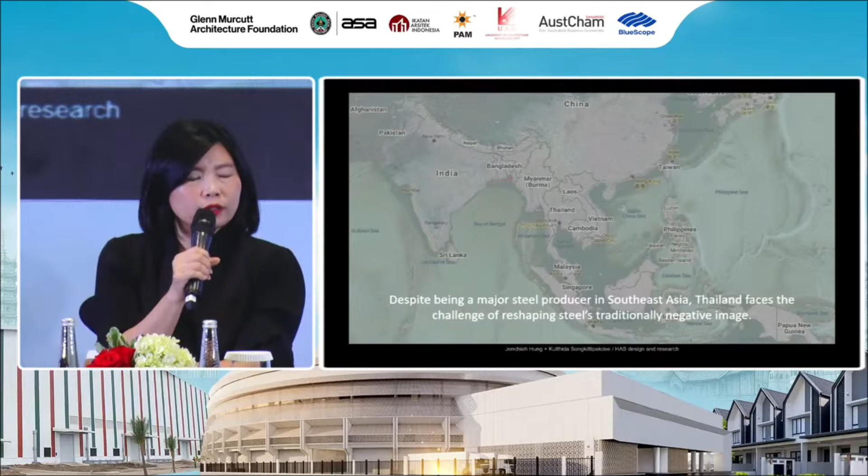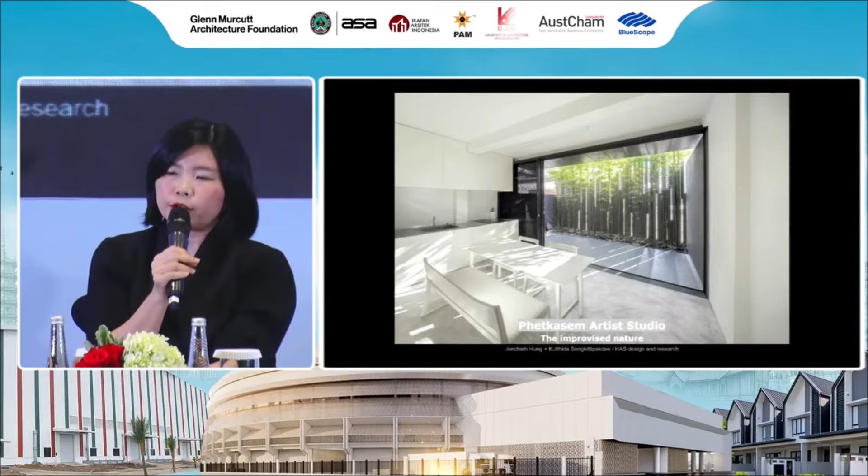From this point, it's applied to a new project that we did for the fence of the same village in our research, and the fence changed the way the steel fence looks. It becomes a facade that creates a new space. And also in this project we call Phetkasem Artist Studio, we really improvise the new nature. It brings a new pattern of green bamboo within the fence limitation of the townhouse in Bangkok. So with this exploration, we continue trying to imagine new ways steel or metal can shape things, even giving new identities.

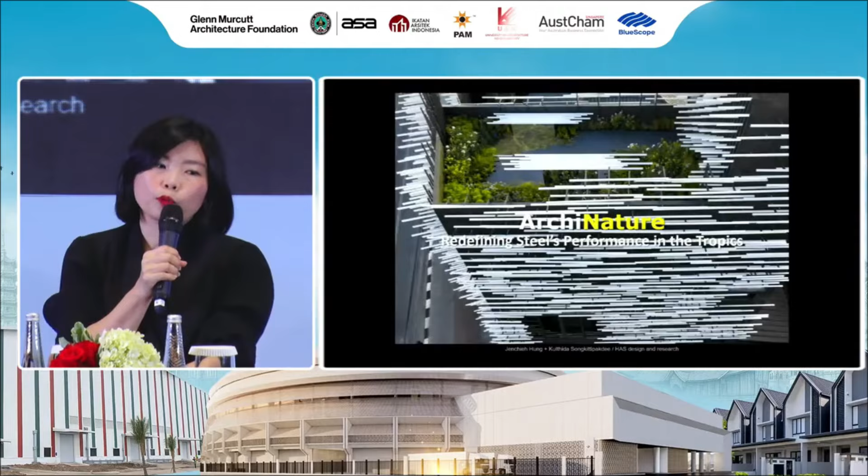So for me, as design research, we think that a resilient future is how we respond to nature in the new nature. That's the term we call archinature. So our architecture designed by HAS tries to squeeze out how materials, steels, can redefine the performance of the new nature in our city in this tropical climate. Yes, that's all from my part.

Thank you for the thoughtful presentation. As you can see, HAS has done a lot of reinterpretation of spatial enclosure, applying steel in different ways and creating different shapes to create different atmospheres, working along with the climate, the sunlight, the breeze, and nature itself.

So, not to waste any more time, Mr. Budi, I'd like to give the stage to you and your presentation, because I think you have quite a lot to share with us. Can you introduce yourself a little bit? Yes, good afternoon. Allow me to introduce myself. My name is Budi Pradono. I'm the lead of the architecture firm called Budi Pradono Architect. It's a research-based firm from Jakarta.

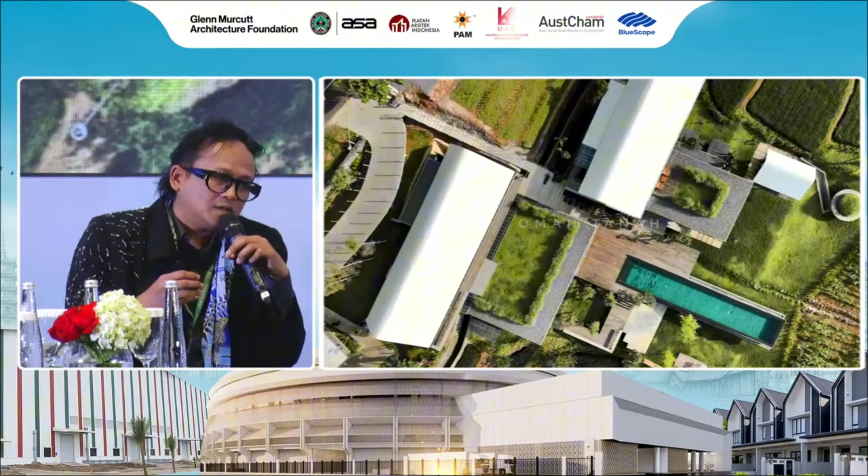And then I try to understand, to listen to the local architecture and interpret it in a modern way. And of course, using steel as a medium to translate the combination between the craftsmanship, the soil, and the concept of the local people in that area. So we can understand that steel is a medium to create new architecture. In the global era, I think it is very important for architects to bring something important to each site, because each site has its own spirit that we have to dig into and create new architecture from.

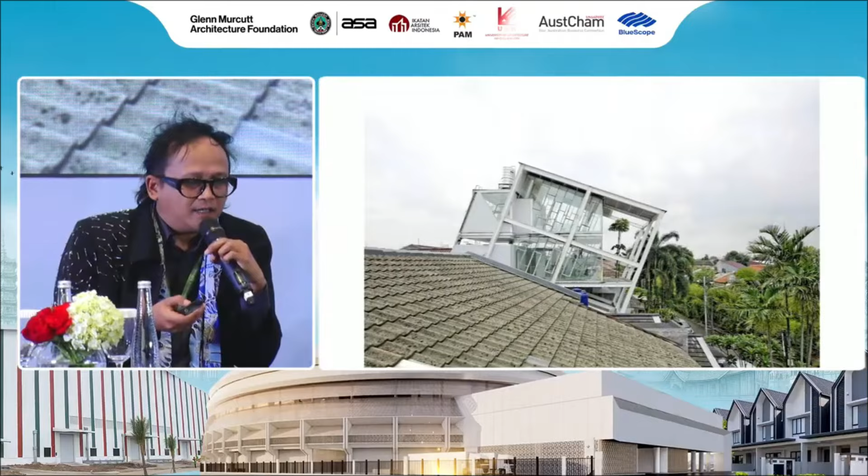Another one is the slanted house in Jakarta. It's made of steel, but it is a kind of critique of society. So I try to listen to what's going on in a part of Jakarta called Pondok Indah. It is a middle-class area, and the successful people redefine their houses with Doric columns, with something from the West. And then I introduce an antithesis by tilting the buildings upside down. So we use steel as a critique of society.

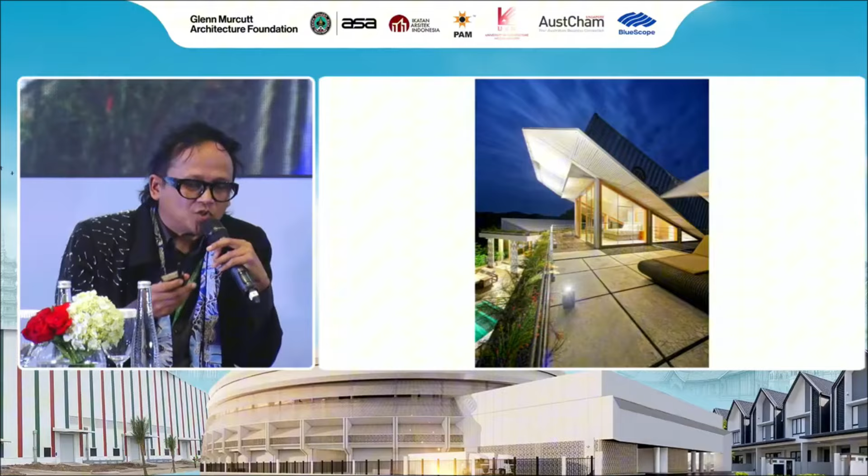Not only a material, a practical material, but also to redefine the spirit of the place. So this is another one in Lombok, in which I try to bring something new, try to understand the beauty of the place and bring the steel as the glue to combine with the spirit of the place.

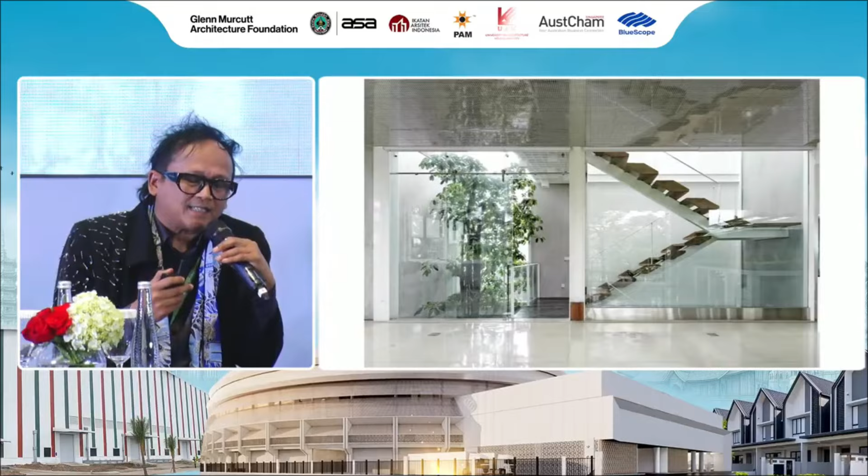This is also in Jakarta. Everything is made of steel, but actually the nature tries to colonize the building, because we try to question nature itself for ourselves. Post-pandemic architecture brings us to introduce something new, to introduce a new relationship between people and nature.

So this is my last presentation, which is the new restaurant. Actually, they have an existing restaurant, but I had to bring a new spirit to this restaurant, because during the pandemic the restaurant was dying. Then I put in a new direction, a new meaning. Structurally it's made of steel, but I also introduce steel to bring the nature inside the building.

So actually, it is very important for architects to ask themselves to bring something new beyond the materiality. And of course, the spirit of the place is very important. Here I try to connect the city and nature, the city of Bogor and the mountain. With the connection, people can relate to something new.

So this is the existing building that we have to keep, but I introduce a new direction to bring a new spirit, to bring new architecture. So we have to use steel with a creative mind, and the locality, the local concept, is very important. So our approach is always trying to understand the spirit of the place, to bring new architecture. Thank you.

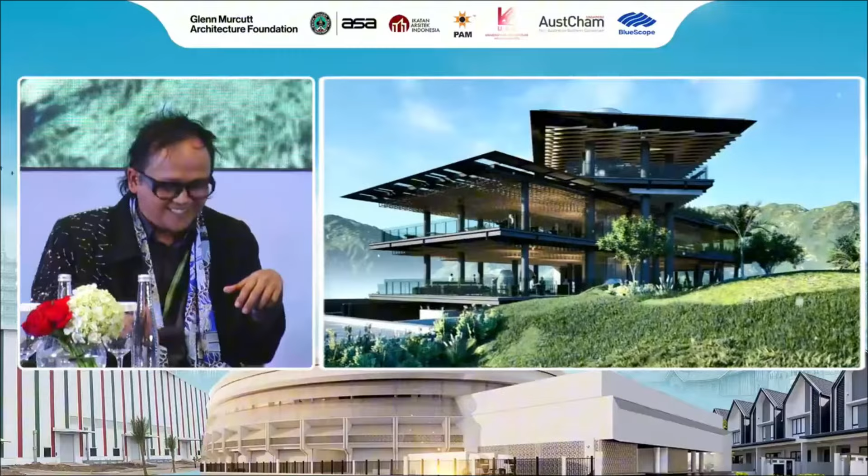Well, in celebrating the richness of the open-air lifestyle, Mr. Budi has shown us a lot about the combination between the heaviness of traditional materials like wood, concrete, bricks, and stone, as opposed to the lightness of steel structure and steel paneling. You can see that opaque material can come together with the lightness of steel and glass.

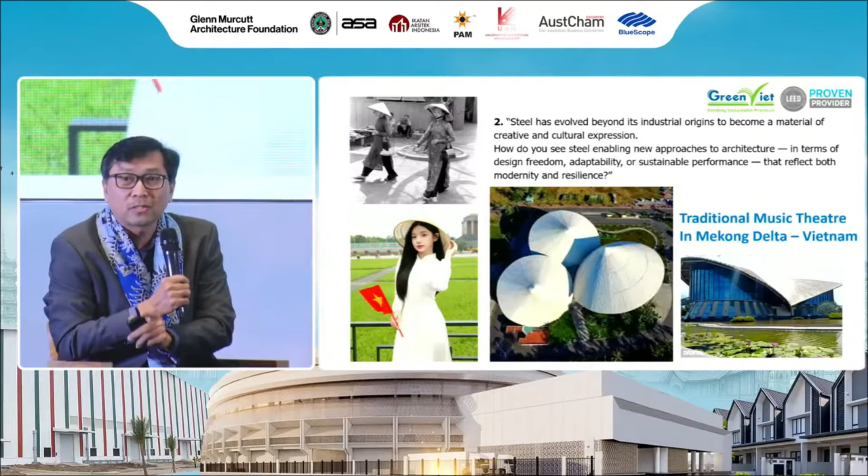And right now, you have to face climate change, urban change, cultural transformation. It means you have a lot of constraints to come out with the expectations of the project. And the expectations include the aesthetic, meaningful, enduring, sustainable, resilient - a lot of things. So you will be facing a headache, right?

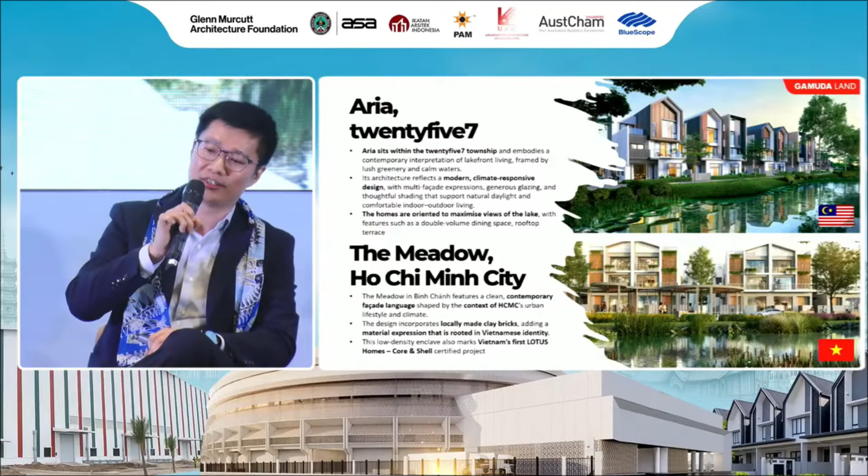But other than the climatic response, there's also contextual response. One of our projects showcased here, ARIA, is within a suburban context. This led us to be one of the earlier adopters of the A-frame concept, which, in look and feel, is both modern and at the same time addresses that climate responsiveness.

The Meadow in Ho Chi Minh City is a different context, so we used locally made clay bricks as well as vent blocks in the facade to express that local material identity, but at the same time still meeting contemporary design facade language, very suited for the Ho Chi Minh lifestyle.

So I come from an era where I used to do project management, and back then when you build terraces, it used to be a copy, paste, and flip design. Very buildable, very efficient, but monotonous, right? But we have come a long way.

Today we have the multi-facade approach. If you stare and look at the picture on the top left long enough, I think you'll begin to see alphabets. The first one looks like an A, there's an I, A-E-I-O-U, right? And since then, materials such as steel enable us to push the design freedoms for the houses or homes that we build. Today we have added another two more letters, which is the U and the N, right here. It looks like a U and N.

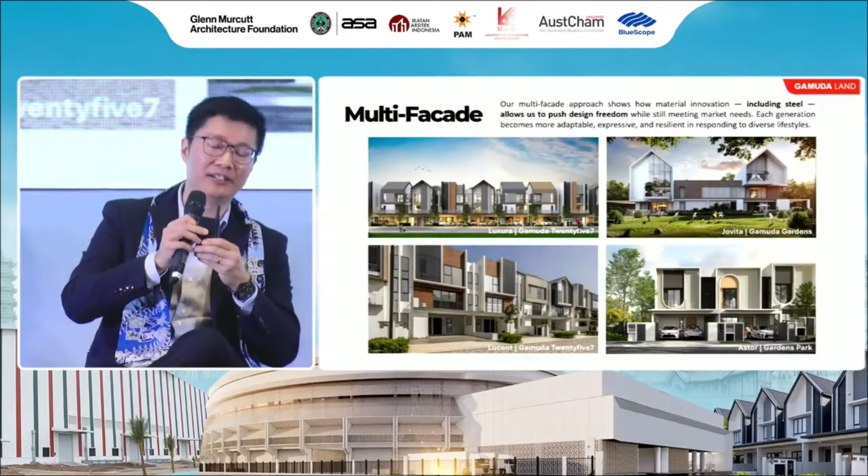But this isn't built using steel. We have our own digital, next generation digital IBS capability. IBS stands for Industrialized Building System, where the entire building, including the facade, is all built within a factory environment, very controlled, very precise. The entire building, all the components, are then brought to site and assembled just like Lego blocks, right?

Where identity is already present, I guess steel is not a tool for expression, but a tool for continuity. One example would be 75 London Wall, which is our flagship adaptive reuse project in London—unfortunately not in ASEAN. But it retains 89% of the existing structural fabric, including key facade elements such as the stone walls.

This is one of the major refurbishment projects in London to date. Moving on, something closer to home, our Wetlands Arboretum Centre. It is the first zero carbon building in Malaysia. Since then we have won several other awards, including ASEAN Energy Awards, certification by MGBC's carbon score, as well as Green RE. This essentially is a living museum within the 90-acre site where we house more than 150,000 trees as part of our conservation efforts.

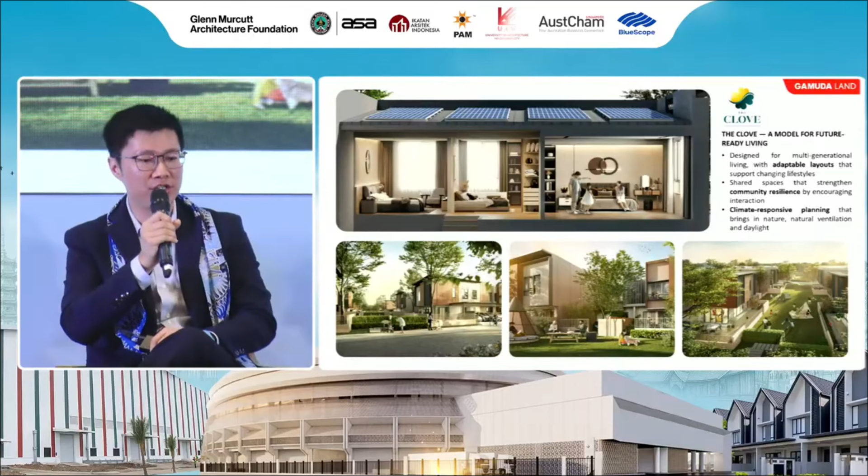Looking ahead, I see three responsibilities for ASEAN architects: to design for adaptability, meaning providing layouts that cater to multi-generational living as well as changing lifestyles of the day-to-day household or community. Other than that, design that strengthens community resilience by encouraging interaction as well as well-being. And last but not least, design for climate responsiveness, which is to bring in nature, natural ventilation, daylight, and resource efficiency.

Our answer to that is the latest typology called the Clove, which showcases that architecture can be more than just flexibility, resilience, and climate-responsive design that can cater to the next generational lifestyle. Okay, thanks—right on time.

Because we are running out of time, I'd like to conclude something very tangible for all of your presentations. We have moved on from something very conceptual to something very practical and visionary. I'd like to address that the future ahead is not much about the characteristics of form-making, but now and in the future it's going to be much about the characteristics of the thinking process.

Regardless, whether the result is going to be mundane or cliché, who cares? Right now we have to be very responsible. We have to take care of the future and the younger generation, the next generation to come. Steel is a part of that—it's going to play a big role for our professionals in terms of materials and new opportunities. Thank you.

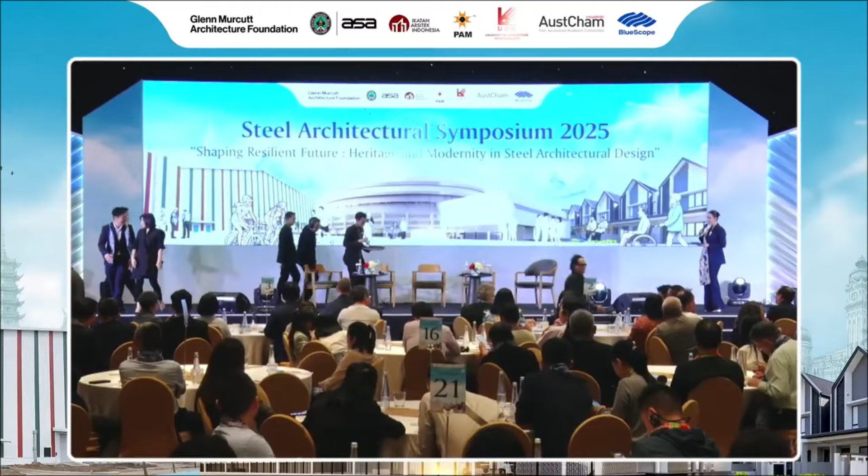Ladies and gentlemen, we have heard from our speakers today that architecture today is not only about constructing structures—it is about designing experience, engineering resilience, and ensuring our cities can stand the test of time, environmentally, socially, and culturally. We also heard that collaboration is a big part of this; it is truly essential to gather together all the stakeholders. All of our speakers today have shared how steel can strengthen sustainability, inspire creativity, and reduce carbon footprints, making this a more responsible way of thinking about the future and the next generation—building cities that are not only beautiful, but resilient and meaningful for our kids and grandkids later on.

I learnt from a wonderful architect here in Australia, Col Madigan, on the Dee Why library that he had done, the beautiful quality of steel in the finesse that one can achieve with it, that beautiful thinness and the tapering to the edges. It's a most wonderful material. And then when it's protected properly and painted beautifully, the material sings. It is so beautiful when used in a beautiful way. So steel is one of those materials that you can actually capitalize on and develop your work in a way that I see gives you the junction, potentially, of the poetic and the rational.

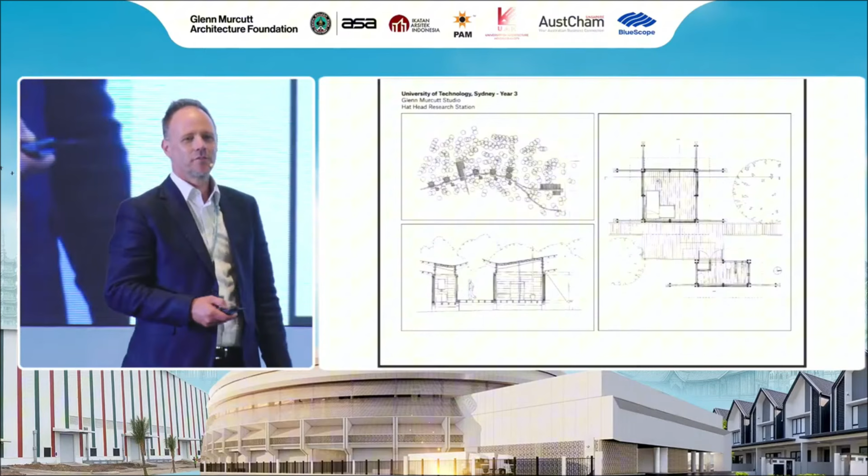I was very lucky. At university, I had Glenn as my studio professor in third year at UTS. And he challenged us to design some little research huts for a coastal site in northern New South Wales. And I was a young, kind of naive student, but I jumped right into it and really enjoyed having him as a tutor. And it really changed the way that I designed, I guess, fundamentally, right up to this point in my career now. It just shifted my entire perception.

After I finished at university, I wrote him a letter and said, "Look, Glenn, I'm graduated now. I'd be interested to know if you need an assistant on any of your projects that might be coming up." And I was expecting, no, I don't take on staff, I don't take on anyone. But I was pleasantly surprised to get a phone call back from Glenn saying, yes, actually, I've got to go and tutor over in Austin in Texas, and I've got a house down in Kangaroo Valley. Would you be able to do the tender and construction drawings for this particular house?

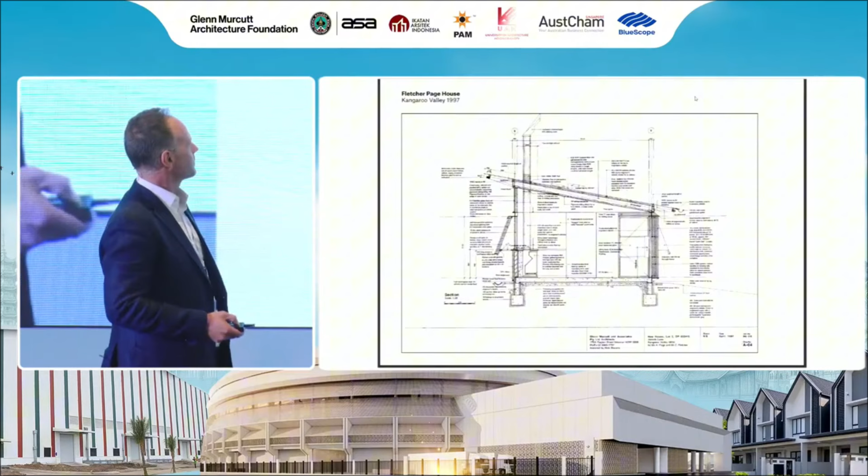And I was a fresh graduate, and this was just the most wonderful gift. So I had this opportunity to work on this project. I did all these drawings. What's funny is you'll see the writing here. I was so nervous about copying Glenn's beautiful handwriting that I thought I wasn't even going to try. So I wrote it all in Helvetica, printed it out on little stickers, and then stuck them on the drawings one by one. But anyway, it's neat and tidy.

And then it went on to get constructed. And it's a beautiful steel-framed house. You can see here this lovely articulation of these steel components, and then the big oversailing roof, which really mirrors the sloping site, and it follows that down and captures all that lovely northern light on the northern side of the building, but then provides this really lovely sense of protection and weather protection. And across the top, there's this kind of sheet of glass.

So about 20 years ago, there was this beautiful book that was produced by Françoise Fromonot. And in this book, there were a couple of projects which I noticed hadn't been built, and there were just some plans in there. And I was fascinated to think, gosh, I wonder what this would have looked like. It was just a plan, not much else. And it kind of got stuck in my mind, and it was always something I was interested in. So, let's go back, sorry.

So, fast forward to about 6 years ago, I'm at a function, and Glenn is there, and we caught up, we had a lovely conversation, and I asked him, are there any more books coming out about your work? And Glenn said, no, there's nothing I can think of at the moment. And then out of the blue, I said, wouldn't it be great to do a book all about your unbuilt projects? And Glenn thought about it, and he agreed. And so we said, well, why don't we do 10 of your projects?

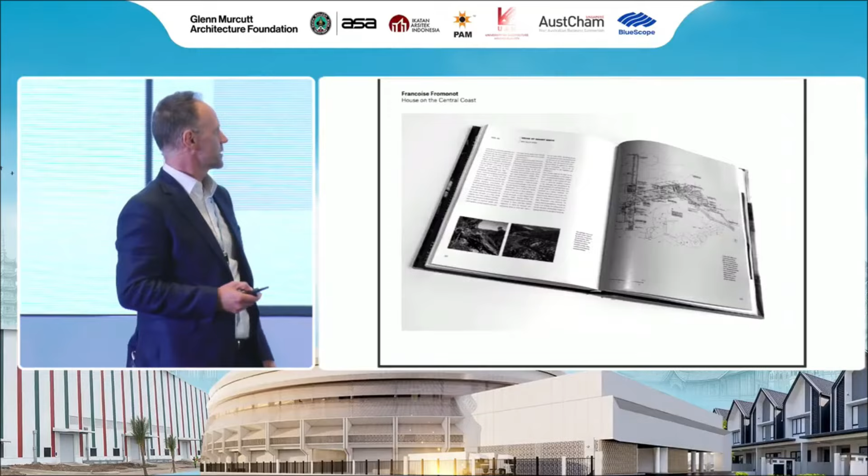We'll recreate them on the computer, so we get all the original drawings. We recreated them in the computer using Revit. And then we created CGI views of each of those buildings as if they had been built and as if they'd been photographed. And then that formed the basis of the book. We chose the 10 projects. It included all of his original drawings, and then I interviewed him about each of the projects as well. And it was the most wonderful privilege to go through this process, and I learned an awful amount about what it takes to design a good building.

So I'm going to share 3 of these buildings with you this afternoon. They all feature steel as a part of the way they've been constructed. And they've all got different aspects to them, all fairly unique to each of their sites. The first one is a house in southern Queensland. Now, what's interesting about this, you can see that's the site location there. And there's this kind of creek or river that runs all the way through.

It's the Nerang River. It's effectively a rainforest location here, and it's not dissimilar to much of the rainforest that you experience in Southeast Asia. It shares a lot of those kind of qualities. It's a very moist environment. There's lots of dense planting, things like mud. There's a lot of mosquitoes, that kind of thing. But it's a really beautiful area.

And so these were the original drawings that Glenn produced. And you can see it's a very simple little pavilion. All of his projects are hand-drawn, by the way. These are just wonderful drawings. But if you analyze the plan, you can see down here that really it's a very simple living pavilion. It's a pair of parallel walls, a lovely big sliding open door there, ventilated windows at either end with the 2 bedrooms, living in the middle, then a services spine through here which contains things like the joinery, the kitchen, and at the back here there's the little bathroom and the laundry and an entry and arrival space.

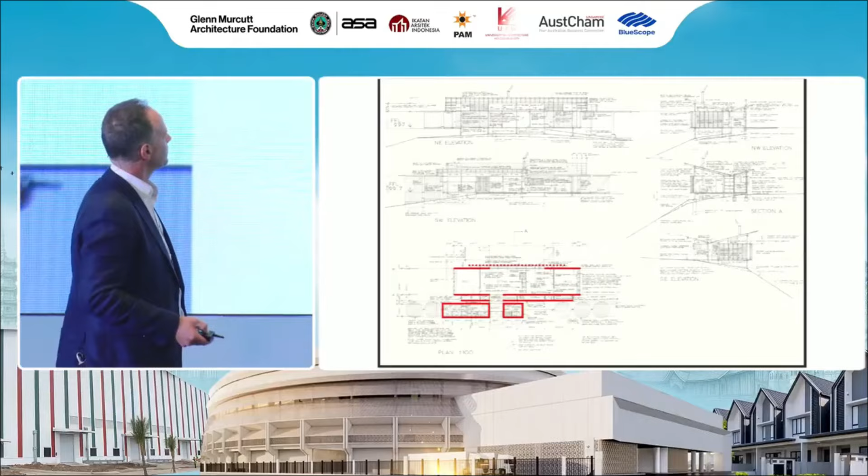If you then look at the elevations, one of the things that Glenn does very well is he creates a very strong sense of order using these horizontal lines through here. And that's really expressed, I guess, with the structure and the steelwork of the building. And that's particularly evident here in the elevations.

Below that line, this is what Glenn talks about, it being an architecture of response. So he locates windows, doors, openings in relation to what the job of that particular thing has to do. If there's a view out that way, he'll kind of frame that view. If it's an entry point, it'll either be wide or narrow depending on its use.

But then up above, you've got this lovely expressive steel roof up here, which is then supporting some timber rafters up in the roofscape. And that whole space along the top there becomes a clear glass clerestory to allow natural light deep into the floor plate.

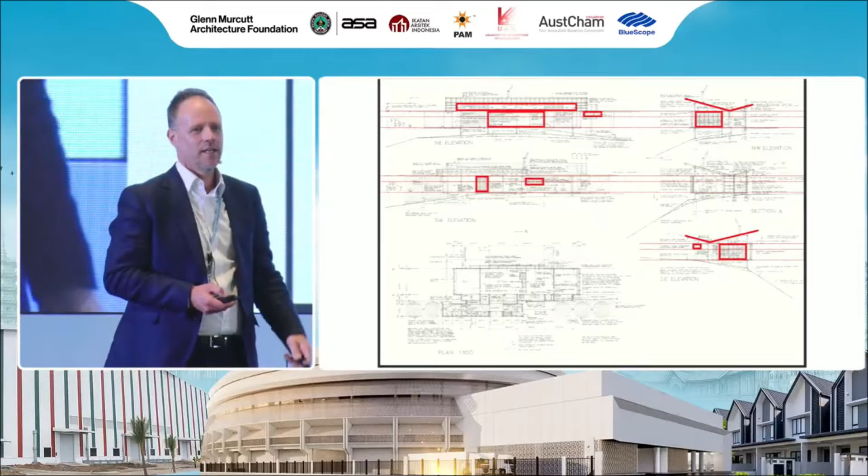But what's really good is that the overhang here is angled perfectly so that it cuts out all of the summer sun, but it allows all of the winter sun into the house. And it performs the dual purpose of collecting water on this otherwise pretty remote site. You can see the water tanks are down through here, all these steel water tanks.

And the reason that Glenn chose steel was because, again, of the location. It's a very moist site, it's very humid. And the concern was that by using timber as the primary structural system, that would start to warp and deform and potentially create problems with gaps opening up and so on and so forth. So the decision was made to use a steel frame.

But it was done with great efficiency. And the idea was that that would form a very rigid framework which would avoid the house from creeping or moving or expanding or contracting. And that would give it some really great long-term resilience. But then the whole building on top of that was then clad in some lovely timber materials.

And you can see here, these are some of the CGI views that we created. It's an absolutely beautiful facade, isn't it? It's got effectively simple kind of crinkly tin walls through here on either side. But then that rail which runs along the top, that steel rail there and one along the bottom, provides kind of the guidelines for these large, expansive glass sliding doors.

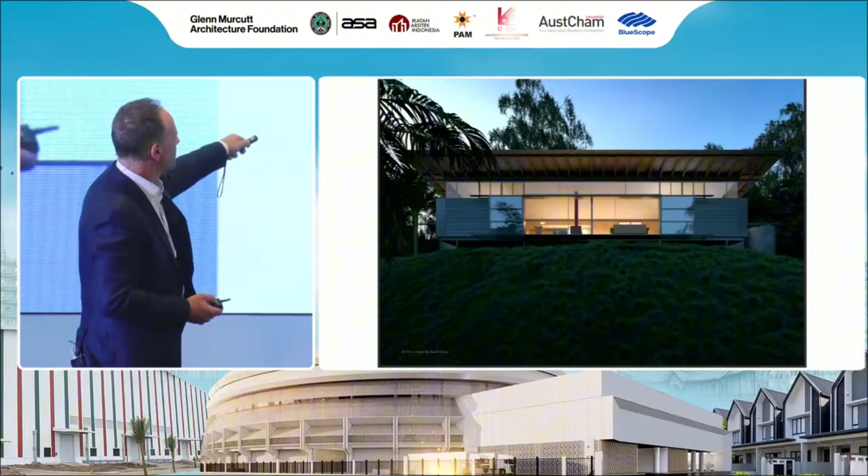And these doors are actually made up of 3 different layers. So the inside layer is insect mesh. The next layer is 2 sheets of kind of sliding glass doors. And then the outside layer, quite often, is the retractable external blinds, which can then get lifted up and down. Which means that you can start to tune up the building according to the time of the day, the time of the year, what the weather's doing.

And in a sense, he describes it like it's like you're sailing a boat. You can kind of trim everything and make it work for you. So you can provide, as he calls it, that sense of prospect and refuge.

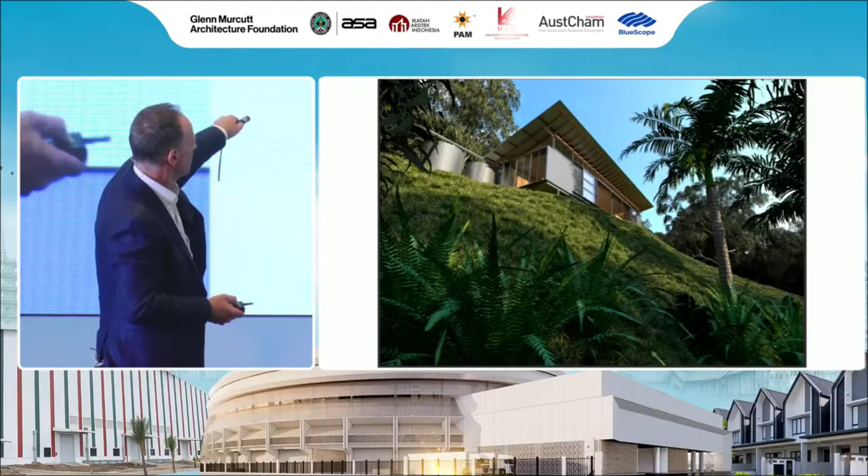And then on top of the building, these beautiful hardwood timber rafters, which then kind of lean out over the landscape to form this really beautiful, sharp steel roof edge here with the corrugated iron. And at the ends, there's these lovely portals. This is the entry side of the building. And again, it's just really, really tough.

It's very simple materials. And one of the things that Glenn quite often talks about is using simple materials, but using them really well. So there's nothing high-tech or expensive or remarkable about the materials that he uses. They're fairly simple, easily available, standard materials, but done with some great inventiveness. So again, it's just simple crinkly tin wall cladding. We've got the big water tanks here as well.

But up at the top here, there is some simple plywood cladding above that edge there, and then simple hardwood beams and rafters. It's a very kind of limited palette, but it works really well in concert with the steelwork. And at the ends where the bedrooms are, you can see it's got operable glass louvers, again for ventilation.

And this is one of the great advantages that you have in Southeast Asia, is there's no requirement to heat a building. So insulation is of no concern, which means that you have the ability to let your buildings breathe. And it's something that we can only dream of in Australia. The legislation with our building codes are starting to make us close buildings up and seal buildings up as if they've been air-conditioned, which I think is a great shame.

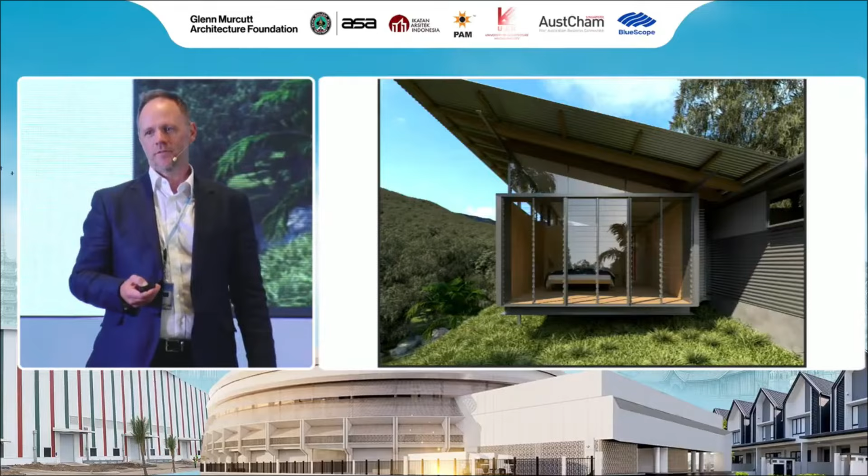But the advantage that you've got in this climate is the fact that you can open things up when you want and you can close them down when you want as well. Natural ventilation, breeze, fresh air, all these wonderful advantages that you've got here, which really can be quite exploited in terms of your designs and the way you put buildings together.

And these are some nice simple shots. This is the gutter, which actually goes beyond the house, and there's this lovely kind of rounded edged trim. Again, it's just a simple dish gutter made out of standard steel profile, but it's sort of treated, refined, improved upon.

Some nice interior shots then. This is all clad internally with hoop pine, some lovely flag halyard chairs through here, again to provide a sense of sort of ventilation for the human body. And in the heart of every house that Glenn does, there's typically a nice big bright red fireplace for those odd days, maybe 2 or 3 days of the year, when you want to heat your house up.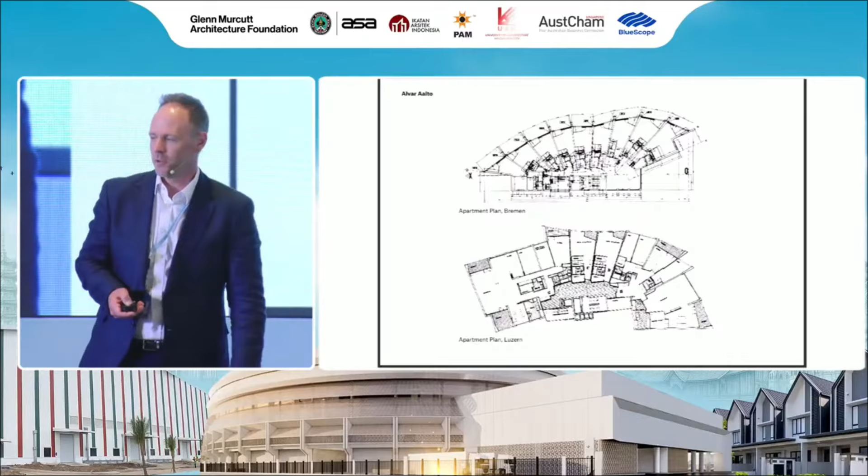And then the bedrooms here, which fan out on the edge, break away from the main building, which I think is in many ways very similar to, and again, some of the students in the room might recognize these as Alvar Aalto buildings, which was one of Glenn's heroes, which fans out to create this lovely kind of built form and provide this sort of sense of generosity. It's also in many ways quite similar to Utzon's house in Majorca, with the change in direction to pick up different views with these separate pavilions.

Again, horizontally, the whole house is broken into these two clean planes. The steel structure is all through the main pavilion with the steel roof on top. But this section through here is actually rammed earth, which is a really beautiful material. You get the local dirt, local clay, and mix it with concrete, and it gets effectively rammed into these beautiful walls. And what that does is it brings the color of the local soil and the local area into the building to make the building feel like it sits into its location and looks like it belongs.

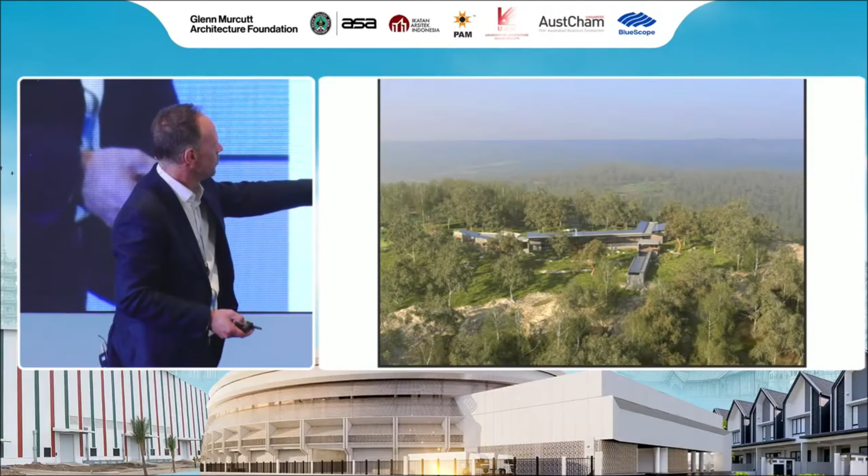And so here are some of the shots that we produced. You can see this fantastic lap pool, which races out towards the peak of that mountain in the distance, and the way it wraps around the top through here. And these views through, the pool kind of erupts out. What's interesting though is the way that Glenn creates that kind of platform, that simple ground plane. The ground below it can drop and rise and fall as much as you want, but it maintains that planar level, which is a really effective way of dealing with some quite tricky topography.

And here at the ends you can see the bedrooms are all splaying out there with the individual children's rooms, and then the main living pavilion here with that lovely steelwork. And there's that lovely night shot. And the view from the front.

And again, all of these are sliding glass doors. They all open up entirely or close down entirely. There are operable louvers which come down to provide privacy and some sun protection, particularly when it's quite glary, and insect mesh as well, and then a covered outdoor porch space. And that's us standing there in the porch, looking that way.

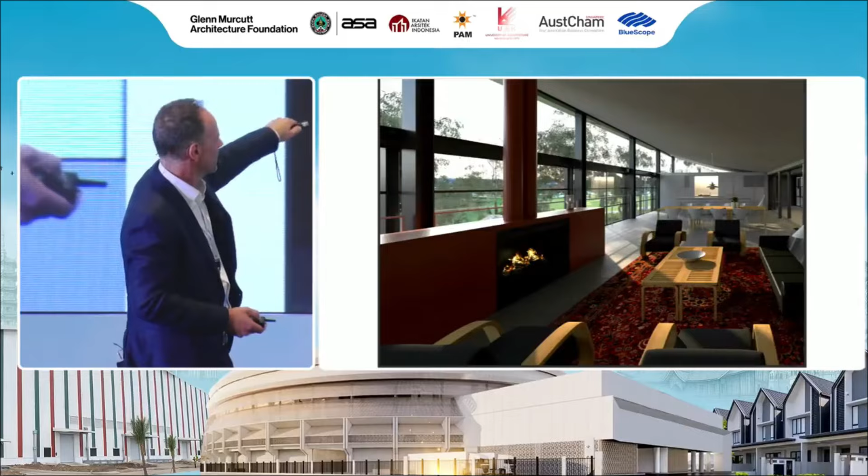Very elegantly designed, very simple, and a really lovely use of steel, which really opens up, I think, the views and the aspect. And again, the nice red fireplace in the center, and the open plan living environment through here. Once all the doors are open, you can actually see the handrails remain. There's actually balustrades there, so once the slope opened up, there's still that safety rail. Again, just in a lovely piece of square steel, very simple.

And a view back then through that main living space from the kitchen. And then that's the main bedroom at the far end. You can see that lovely rammed earth wall system, which kind of layers up. And this is Glenn's favorite shot, that shot across the pool. He loves water in his projects, absolutely loves it. But you can imagine being in there, can't you? It's a beautiful space, sort of swimming out towards that mountain.

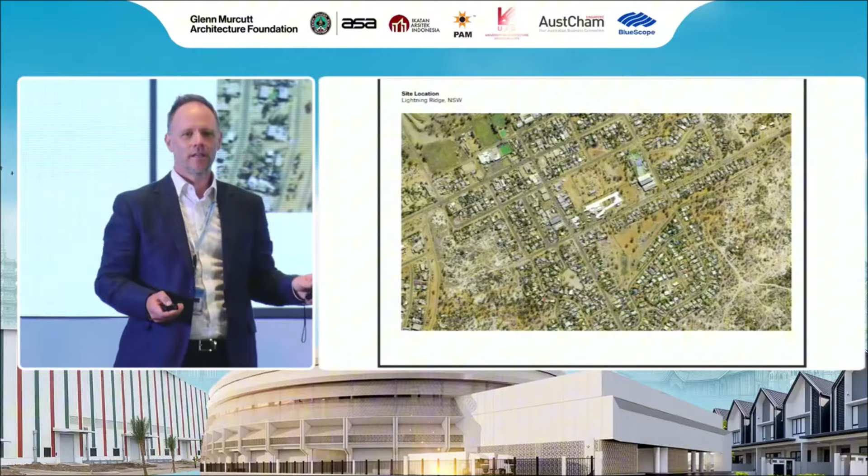The last project that we're looking at is a community centre that was done in Lightning Ridge. Now, Lightning Ridge is in far north New South Wales. It's a very hot, dry, arid, almost desert-like environment. And that really necessitated an interesting design solution. The brief called for a community centre, which was office spaces, a cafe, meeting rooms, I think some childcare, an artist's little gallery through here and some other spaces, and an internal courtyard.

So the diagram is very simple. Again, it's this kind of simple flow of elements which then break out and really respond to the uses and the views that are being kind of exploited. But what Glenn thought could be interesting is the idea of a building inside a building. And he was inspired by these beautiful shade structures which are in Bilpin, which is actually the apple growing district just north of Sydney, where there are acres and acres of this beautiful stretched cloth over the top

of these beautiful orchards. And he recently did, around 4 or 5 years ago, this lovely pavilion in Melbourne, which was called the M Pavilion, for which he used a stretched cloth roof on top as well. So it's similar to that one. And these are some details from that project. So his original design then, you can see here, is a building inside here with its own roof, but then another building up and over the top, which is this steelwork structure. And then stretched across the top there is that open fabric weave.

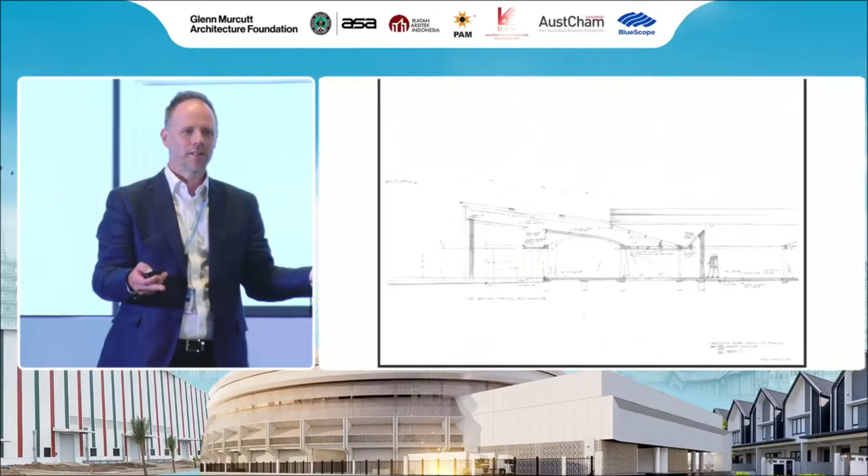And the reason is so the building could be shaded before the sun actually hits the building by a separate structure. And it also meant that any rainwater that would come fairly infrequently during the year could get filtered through that and then collected on the roof and then collected into the tanks. And so in design developing this one, Glenn couldn't help himself. We actually developed all of the roof edges, despite the fact his original drawings didn't have them, but I think it made it a better project. So that was kind of fun.

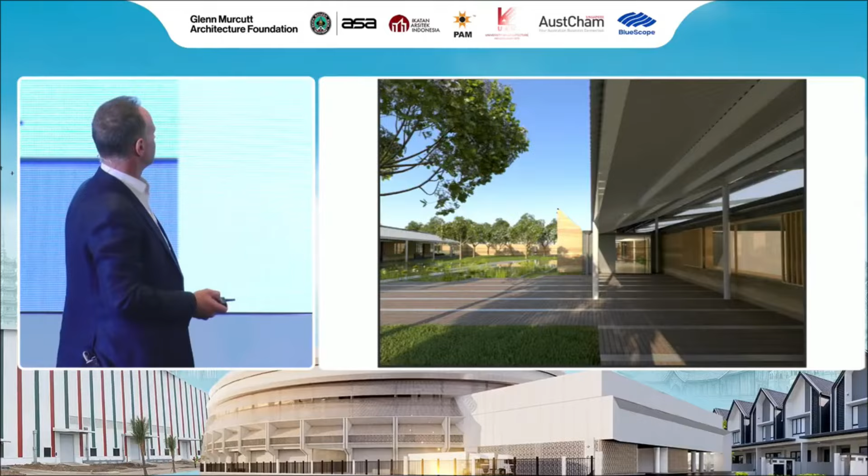And here are some lovely shots then of that building. You can see that roof up and over. Solid roofs through here. Again, it's all really standard steelwork detailing, crinkly tin, standard steel profiles, but well considered and well built. And then the use of lovely vertical slatted screens to provide a sense of protection but ventilation as well. And then some of the views then into the main community spaces. This lovely central waterway through here with native plants in this grove of cedar trees with their lovely white flowers.

And that's a nice articulation of the building inside the building. And then a lovely sequence of spaces according to the uses inside. Changes in ceiling heights, vaulted ceilings, low ceilings, stepping areas, a nice sense of progression as you walk through the building. But I just wanted to leave you with 3 quotes, which I think are really important, and particularly for any young designers in the room.

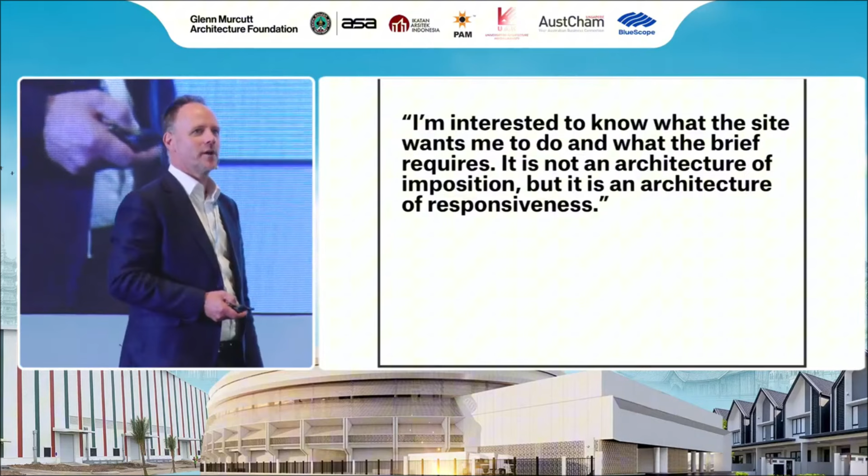And this is the key one. I'm interested to know what the site wants me to do and what the brief requires. It's not an architecture of imposition, but it's an architecture of responsiveness. And that's all about not imposing what you want to do for the building. It's actually understanding what the building wants to be. And that's a very different mindset. And he used to tell us when we were students, I'm not interested in what you want to do. I'm interested in knowing what the building wants to be. You must respond to the challenges and the issues.

His often used quote is: my role is that of a discoverer, not an inventor and creator. We create nothing. Every solution exists. It's there to be discovered. Glenn talks about it being drawn - you need to draw out the solution. That's why he's so keen on actually physically drawing, the idea of drawing out an idea, because the answer exists. You've just got to go and find it, reveal it somewhere. There is a logical answer somewhere.

This last one is lovely as well. Glenn loves to live at the junction of the rational and the poetic - not spectacular or novelty, he's never been interested in that. I'm interested in honesty and authenticity. It's that moment, as he calls it, of reverie, when something comes together which is supremely functional but beautifully executed. And that's what really makes wonderful architecture. Thank you.

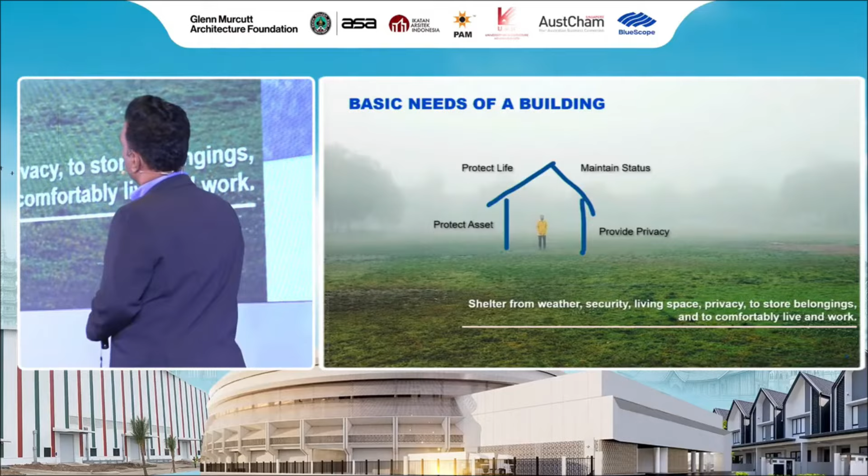Thank you for joining this session on the role of coated steel in resilient design, and I'm glad to contribute to this discussion with my knowledge on coated steel. If you think of any building, basically roof and wall are the primary components, and they primarily provide fundamental functions like protecting the lives of individuals staying inside the building, protecting their assets, giving them a status, and also ensuring their privacy. These needs are uniform across our region, but the challenges architects face are not uniform.

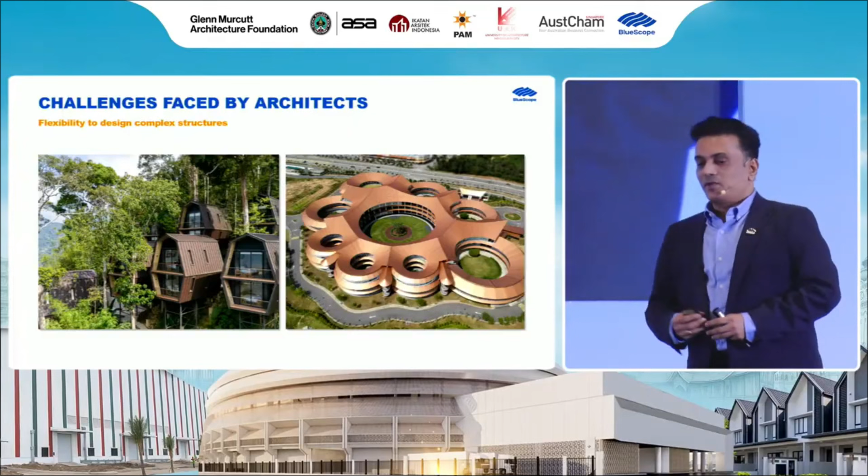In today's era, architects face various challenges in selecting construction material for the roof and wall. Flexibility to design complex structures stands top of the list. I think we had a previous group discussion forum where I also heard the team sharing that it is very difficult to form a structure if you don't have the right construction material. If you look at our conventional construction material like concrete, basically they restrict design flexibility, especially for curved roofs and extended eaves.

Being a tropical region, most of our countries are exposed to high humidity, heavy rains, and salt-laden winds, which really accelerate corrosion. Corrosion is really one of the key design enemies, and architects are constantly looking for a material which can withstand severe high humidity and severe corrosion resulting from marine influence and also industrialization.

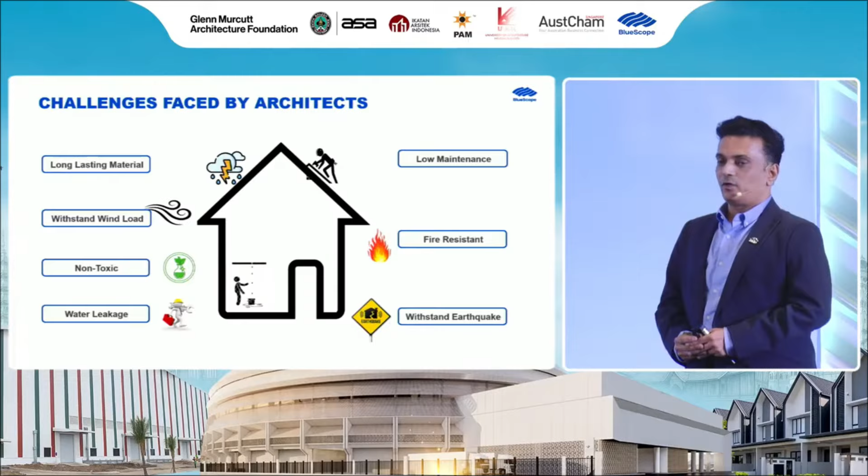Beyond corrosion, sustainability is one of the key driving factors in selection of material. Green building certification is no longer an option - it's an essential gateway for leading projects in the commercial space. Architects are constantly balancing heat reflectivity, carbon emission, and long-term durability of products. Apart from this, most construction materials need to be long-lasting - free of toxins, free of water leakages, low maintenance, fire resistant, and able to withstand a climate like Indonesia.

Speed of construction is also a pressing point for architects, because project owners are looking for accelerated timelines with fewer delays. With all these challenges, architects have various construction material options on hand. Typically, conventional construction materials like bricks, concrete and tile roofs have served us well over the years, but they lack design flexibility and speed.

Contrary, steel as a construction material provides transformative benefits. It not only enables bold and complex structures, but also helps reduce structural cost as well as speed of construction. Steel, when used as a construction material, really brings your design ideas into reality. It can help you create elegant forms, long spans, hybrid structures, and also the design.

Steel, when used as a roofing material, also ensures low risk of water leakage. Typically, this low water leakage property is very important in our tropical climate. Precise roll forming and engineered fastening systems ensure water tightness.

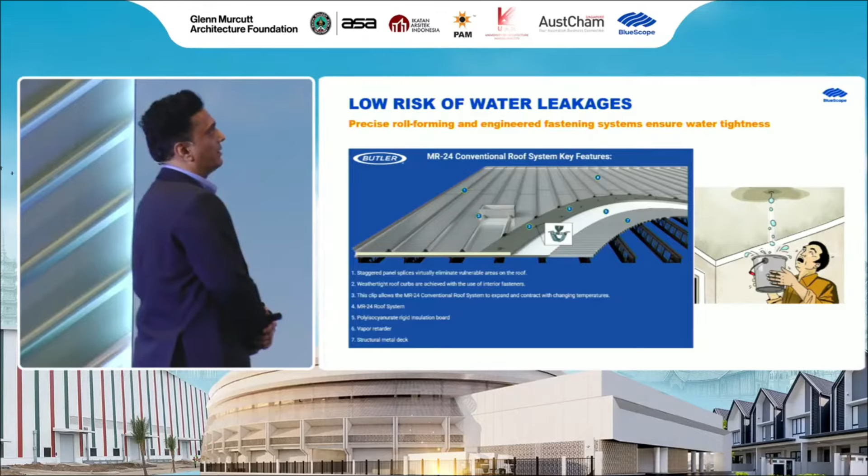Beyond water leakage, steel also has the advantage of being lighter in weight, which reduces the load on structural frames and thereby potentially reduces project cost. Steel is also pre-engineered in factories, cut to length, and enables installation of larger panels, thereby increasing overall construction speed and efficiency and reducing overall project cost.

Although you have seen the advantages of steel, selecting the right alloy coated steel plays a very important role in determining how the building will age over time. Typically, there are two types of galvanic coatings available in the market.

The first one is a zinc-rich coating, known as Type Z, also known as galvanized coating, which is a combination of 99% zinc with some additive, and it works on the principle of sacrificial protection. This provides baseline protection, but in a tropical environment, the zinc-rich coating doesn't fulfill the overall demand against corrosion.

Aluminum zinc type coatings, on the other hand, are a relatively newer generation of technology. They combine the best of aluminum and zinc together. Aluminum gives barrier protection, whereas zinc gives sacrificial protection, and this dual corrosion protection mechanism ensures the corrosion performance of ZINCALUME steel is much superior to galvanized steel.

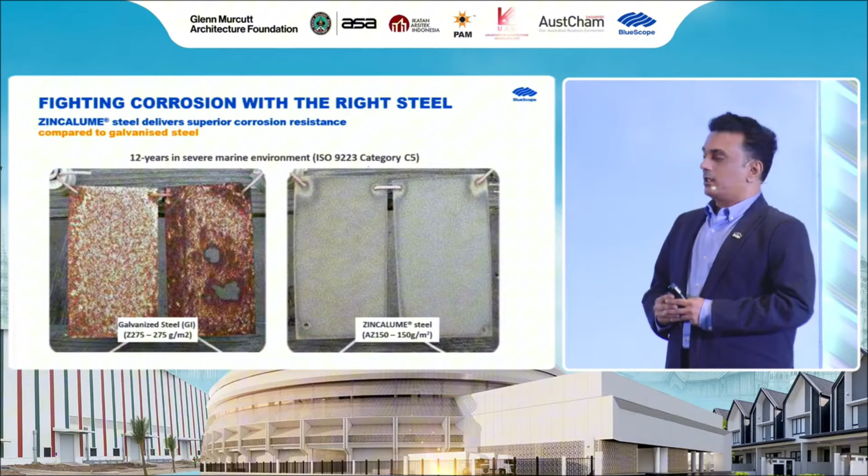This data point is really important for our tropical region because most Southeast Asian countries have a long coastline and a tropical monsoon climate. Based on this exposure corrosion mass loss data and industry-wide recognized testing, it can be concluded that ZINCALUME steel has approximately up to 4 times the lifetime compared to galvanized steel.

A clarification point on this slide: ZINCALUME steel is the BlueScope brand. Being a leading brand in aluminum zinc coating technology, the ZINCALUME name has been used as a standard reference for a lot of aluminum zinc coatings in the market, but they are not all of the same quality.

shows color fading and dirt staining. The point here is that galvanized steel, on the right hand side, with pre-painted polyester, once exposed to accelerated outdoor testing on a hot rack, within the same period of time started showing heavy signs of chalking and color fading. At the same time, Colorbond, when exposed to similar conditions, maintained its original beauty, as the pictures speak for themselves.

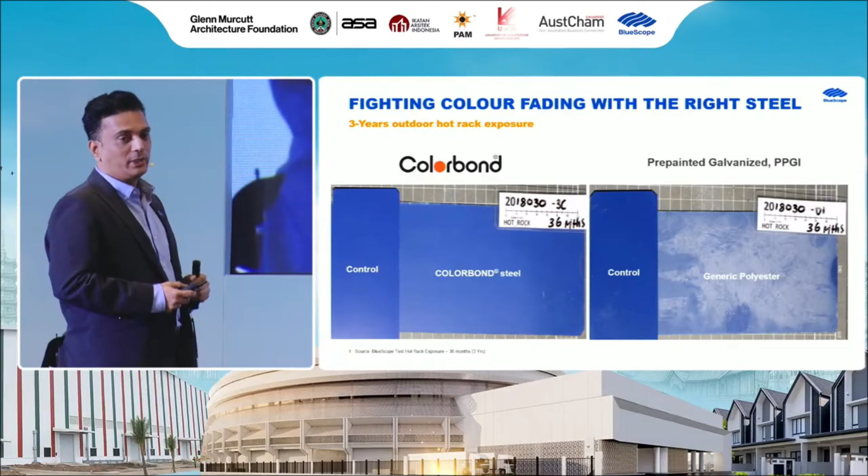Initially, the two materials may look identical, but once exposed to sunlight with harsh UV light, they will start deteriorating based on the type of polymer technology being used. COLORBOND steel is based on a ZINCALUME steel substrate, engineered with advanced paint technology for the tropical climate, giving you the best color retention properties.

Typically, COLORBOND steel is available in multiple functionalities. THERMATECH is a solar reflective functionality that reflects the infrared radiation from sunlight, giving you cooler indoor temperatures. Whereas clean technology is a self-cleaning type of mechanism which cleans the dirt, tropical dirt sitting on the surface.

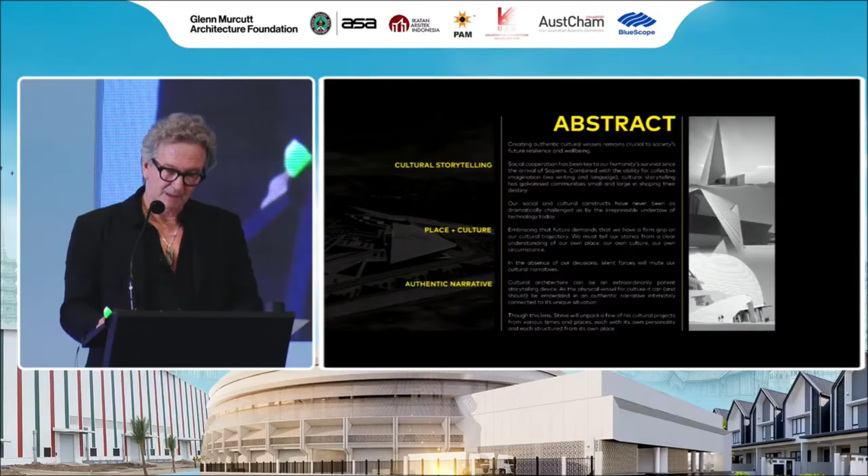Social cooperation has been a key to our humanity's survival since the arrival of sapiens, combined with the ability for collective imagination, largely via writing and language. Cultural storytelling has galvanised communities small and large in shaping their destiny. Storytelling allows us to aggregate our thoughts and beliefs through which our culture is formed.

Our social and cultural constructs have never been as dramatically challenged as by the irrepressible undertow of technology that we all face today. And in the face of these many abstract changes to society, I think that the need for grounded, authentic storytelling is significantly heightened. Embracing that future demands that we have a firm grip on our cultural trajectory, that we must tell our stories from a clear understanding of our place, our culture, and our own circumstances.

In the absence of our decisions, silent forces will mute these cultural narratives over time. And I think the arms race between artificial and real intelligence begs many questions and challenges. Restoring and reinforcing our own authenticity in our own places and cultures is vital.

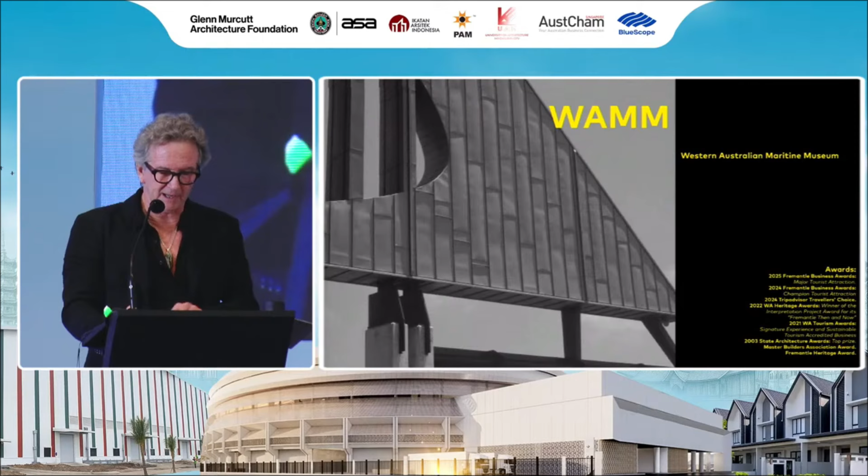The West Australian Maritime Museum is probably WA's focal building for the state's ranging maritime stories. We have significant maritime stories, and it's located on the edge of our main working harbour within Fremantle. The setting itself is quite a remarkable one. The building is perched on what was the original headland into the river and within metres of what was the place of first landing for the Swan River Colony in 1829.

It's also been a place of significant man-made intervention, which you can see in the underlay on the slide, in particular, C.Y. O'Connor's wonderful sweeping harbour. The design evolution of the building emerged from a fascinating array of influences, both uncovered and discovered as we progressed.

As Western Australians, we are people immersed in a rich maritime heritage across a diversity of cultures and geographies. And we are the custodians of a pretty vast and varied coastline and the keeper of a whole myriad of maritime tales. And it's through these that the building has been born. The project concept at its heart had a story of two things, the notion of a boat and a promontory.

The architectural imagery of the Maritime Museum draws on the simple association of boat on the promontory, an image widely held across different periods and regions and endeavours, and it carries the connotations of bliss of the Sunday sail on the Swan, or of endeavour in terms of stranded luggers in Broome, and reminders of risks in terms of the harsh realities of the many shipwrecks that dot our coastline. So the specific analogy is the clinkered hull of the first landing dinghy sent to this very promontory and pulled up on the sand.

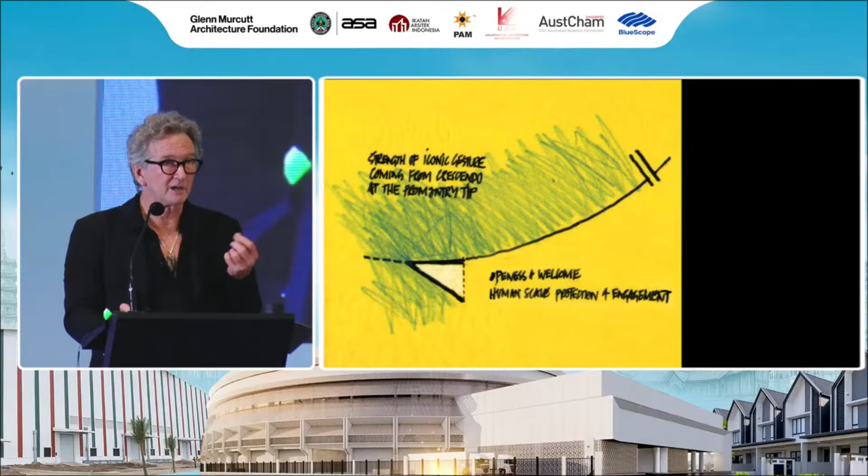The first part of the story then is the promontory. First Landing is a site of enormous significance, as I've explained, but it was a promontory which had actually been lost. The new museum helped to re-symbolise the significance of that place, recreating the original sense of promontory which once existed. The project in that way reclaims the meaning of the site and also opens up the promontory for public access.

The geometry of the gentle sweep of the harbour, which is C.Y. O'Connor's intervention for the main working harbour, along with the alignment of the slipways to the south, creates a powerful form whose apex points out through the heads to the Indian Ocean. The strategic positioning of the museum places it at the nexus of three distinct characters within the harbour: the ocean and river, the wharf, and the shipyard to the south.

The second part of the story is the boat, the image of the clinkered hull on its side lying in the sand. This image drives the formal gestures of the building and is most strongly expressed in the bold, unique curved surfaces of the main roof and leisure gallery. And the overall silhouette then is one of the gunwale line gently rising from the stern in the east, leading to the apex over the water and concluding with the bow out to sea.

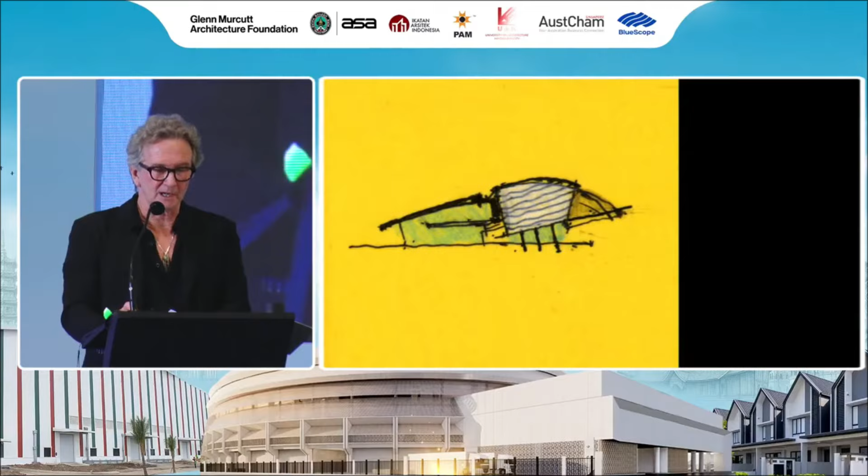The water side of the hull then generates a soft, curvaceous building facing north into the harbour, ever-changing in shape as you move around it, and leading out to the west to the Indian Ocean.

The deck side, which is the southern side, promotes a flatter, kind of more industrial skin to the building, where it acts as a unique backdrop to a whole range of industrial objects, such as the harbour cranes, the slipway machinery, the wharf sheds, and the Oberon submarine. So in contrast to that northern composition, the southern elevation promotes a much more layered visual experience through the wonderful filigree of the cranes, slipways, and submarine.

The boat on the promontory is a story of land and sea and the transition from one to another, the concept of stepping on and stepping off. And this is a central theme in many of the museum's maritime tales. To that end, the design of the building expresses this transition by locating the entrance on the east, journeying out westward. The eastern half then is seated firmly on the land, and there's a distinct transition point out to the west where the building is perched out over the sea.

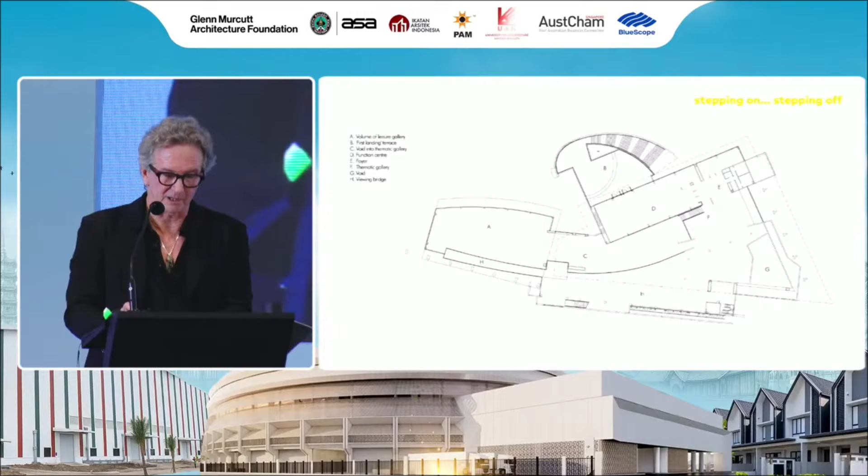Internally, the hull form creates a wonderful curved and sculptured volume. It houses the central leisure gallery, which runs pretty much right through the building, incorporating a diversity of major craft from early pearl lugging stories right through to Parry Endeavour and Australia II as one of the focal elements. The space has been structured as one would a boat in a way, with curved steel plate and timber frames to which a hull cladding is applied, thus revealing the shape.

The structure is expressed within the space, giving a sense of being within, if you like, a giant hull as the internal experience. And those internal experiences allow a multitude of vantage points to explore the objects. So at the lower level, one can experience the underside of the hulls and their workings, whilst at the upper level, the viewer can enjoy a deck level experience.

Industrial steel armatures form supportive and immersive frameworks for exhibition pieces and viewing platforms. Again, a kind of legacy of the working harbour industrial experience. And the cultural experience extends the functionality of the building to be a very popular and unique celebrations and event space beyond its simple museum function.

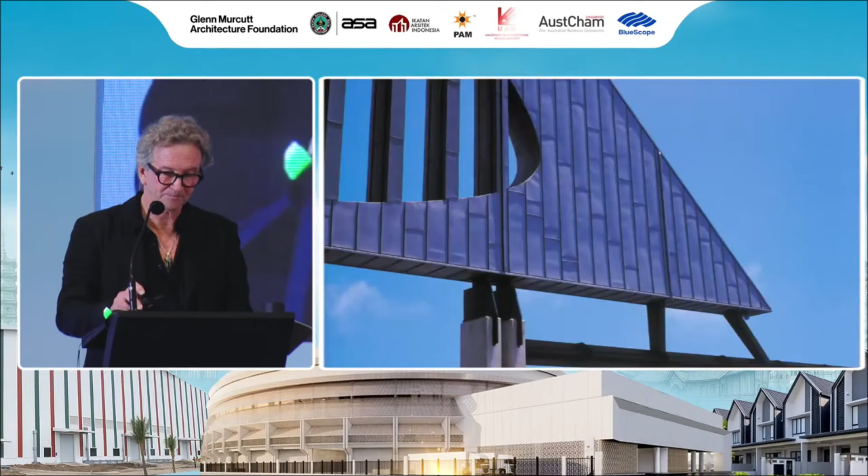The western prow of the building forms an emblematic and sculptural terminus to the composition directly derived from maritime forms. And an upper level public terrace forms a beautiful place of outlook which is positioned pretty much exactly at the point of first landing, and it's a natural point of gravitation along the harbour's edge.

So the entire composition looks out to the Indian Ocean beyond, and the museum sits amidst the daily theatre of the working harbour itself. And in a way, this becomes a living extension of the museum's stories itself, adding to its authenticity and its contribution to place, a form of potent reference point for WA's maritime legacy.

So we move to the Albany Theatre Project, which sits on Australia's southwestern coast. We won this commission via a national design competition, I think in around about 2008. Albany in southwestern Australia is a regional town holding a very rich history where land and ocean and town and harbour come together to create one of the great natural harbours of the world, as was identified very, very early in the piece. So the setting as a stage is extremely important to that southwestern region.

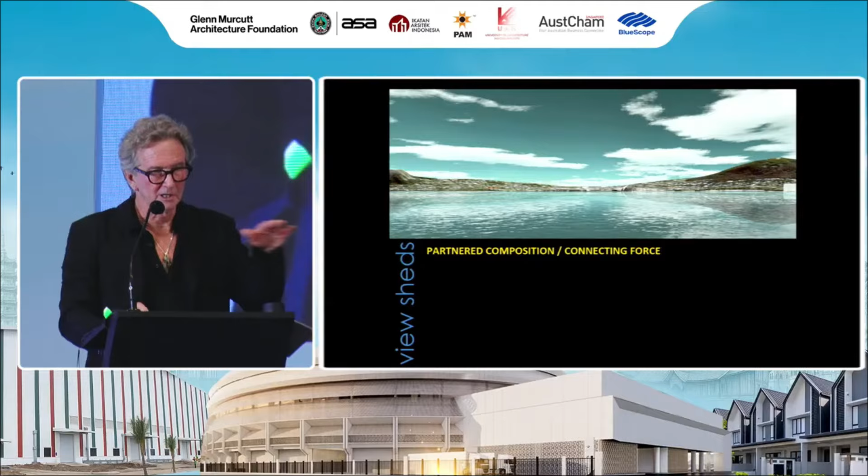The township is seated within its own amphitheatre of significant hill forms surrounding it, looking down onto the waterfront where the theatre sits. The interrelationship between land and sea is intrinsic to the composition of Albany, and the topography is what created the harbour. The building forms, if you like, a crucial nexus between that topography, between township and harbour, connecting the community to what was a lost waterfront.

The project was conceived as a kind of fully rounded sculptural object whose forms were actually derived out of the crystalline molecular structures of the granite which surrounds the hills, surrounds the entire site. So the setting demanded, we believed, a building response that was able to be viewed from all dimensions, from above and below. So a series of folded, interlocking forms create the overall envelope. The crescendo of the form occurs over the fly tower, which becomes the celebratory peak to that sculptural response.

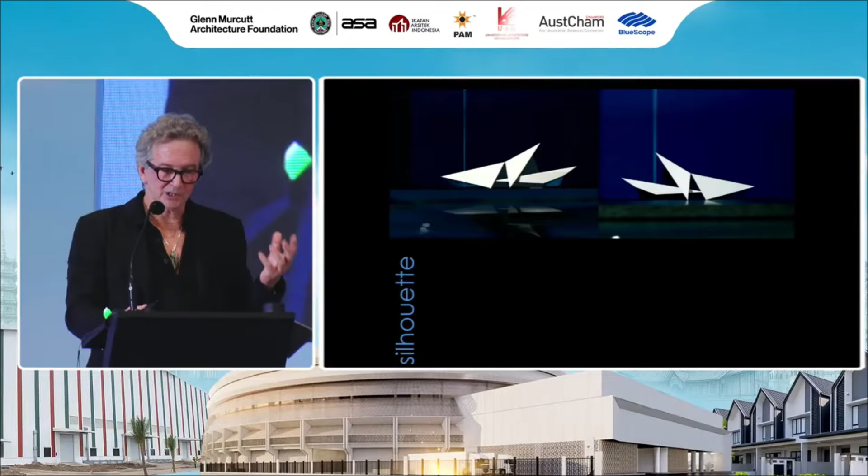Connected triangulation provides a highly stable structural steel framework which perches delicately on the harbour's edge. And then the topographical silhouette is echoed in the articulation and undulation of the building form. So the building's silhouette folds and moves to form highs and lows, reminiscent of the saddling hill form surrounding. I think the importance of the sculptural form is paramount to this location to enhance the shoreline vistas to and from the harbour. And in a way, roof and wall fuse into one.

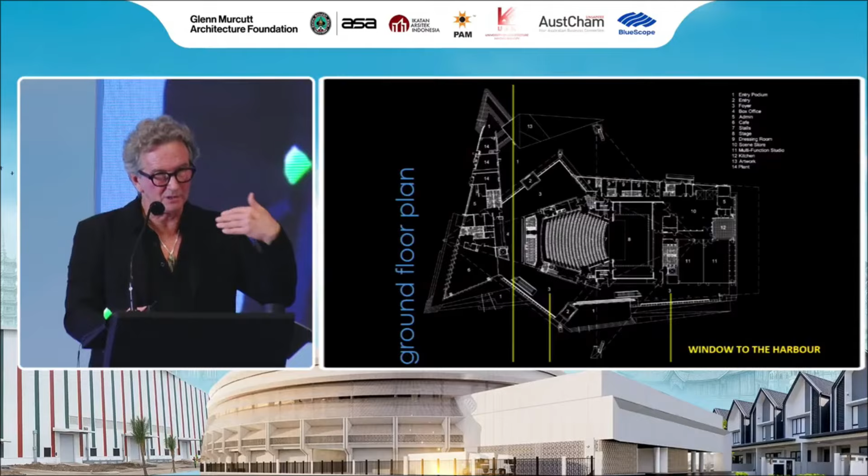The planning assembly is the result of an integrated tripartite with the theatre itself at the heart, wrapped around by the front of house areas and sheltered by that triangulated folded envelope. And that folded form sits and lands gently on the wharf side at 4 points only. The centre forms a critical window to the harbour, so those foyer spaces all have visual engagement to the harbour, which is why we wrapped the foyer around. The public areas are highly transparent, promoting vistas out to the sea, but also back into the township.

The form then generates a series of progressively increasing volumes from the west, and at its peak, the form houses the fly tower, which then reads as an integral part of the composition, rather than the traditional box-towered fly tower, which we were keen to avoid. So the theatre then creates a kind of jewel-like object placed in the heart of the harbour. It is, in a way, a piece of waterside sculpture, which is bred out of the crystalline molecular structures of the earth.

The theatre itself is an international standard regional theatre which set new benchmarks, certainly for regional theatres in Western Australia. But importantly, it has brought significant new daily life to the foreshore, which had previously been separated, along with being a potential postcard experience for Albany. But it is a place for people on the waterfront which unlocks a lot of the rich history of the wharf.

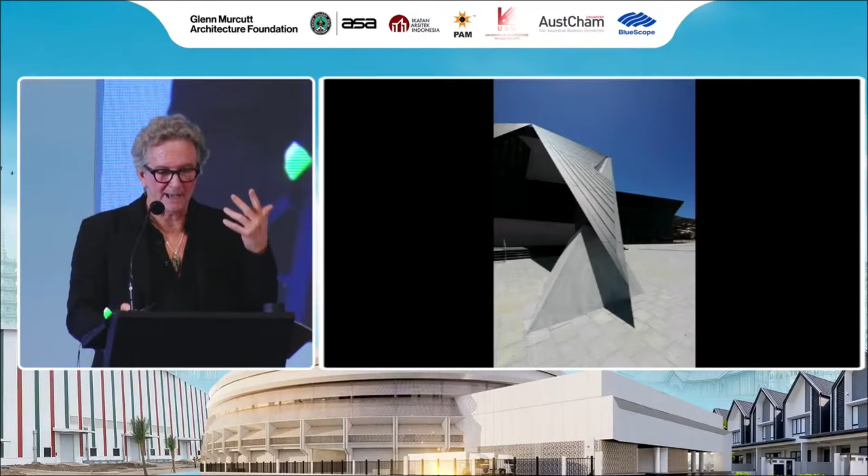The building skin itself forms a critical element in that sculptural expression. Each of the cut faces of the crystalline form is clad in metal. That patinated metal responds to the natural palette of the surrounding grey granite hills and vegetation. So you get these beautiful silver greys of granite, and the building is seen as a part of that palette. And it responds quite sensitively to subtle changes in light, bringing the building to life throughout the day.

The broad narrative of the AEC is also extended through a range of commissioned public artworks by a sculptor, Jon Tarry. Jon worked very closely with us from the inception of the project, and his beautiful sculptural works add to the resonance and consistency of the storytelling and sense of place.

The internal public spaces, as I said, wrap around the theatre, around the building's heart. The volumetrics of the spaces follow the folds and planes of that external shell. And the public spaces at all times have visual contact to the harbour, so there's a clear relationship to harbour and back up to the township.

At the very heart of the composition, the main theatre adopts a more internalised, intimate demeanour. It is deliberately darker and lusher than the public areas, and it kind of cues a sense of focus and drama as you arrive. At the eastern end, the multifunction performance space enjoys its own separate and discrete identity with separate access as required. Its volume is created by a secondary wedge form which emerges outwards from the fly tower.

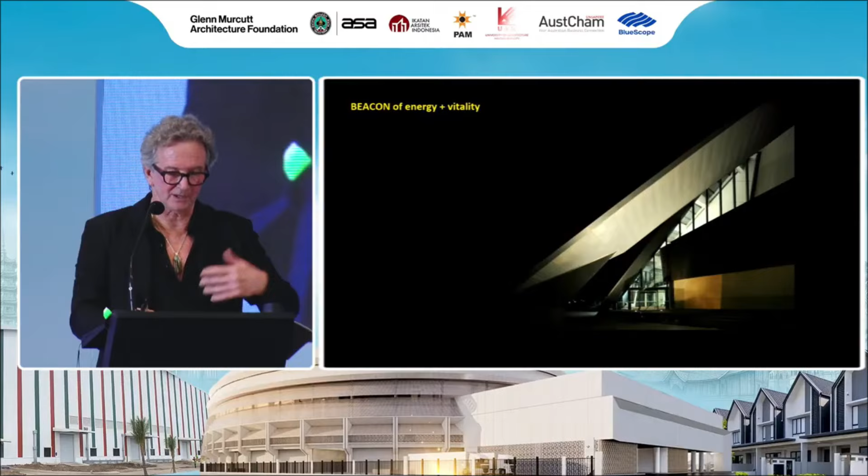At night, the building becomes a beacon of its own energy and vitality. The public foyer spaces become fully revealed. The activation within engages outwards to township and harbour. And it forges a myriad of pathways and accesses between township and harbour, both to the edge and to various landscaped arrival areas. And externally, there's a raft of places and spaces for informal gathering and socialisation on the harbour's edge.

As part of the overall harbour composition, it's an elegant and non-imposing piece. It's deliberately visible. It is a large building in the context, but it is a sculptural piece which is part of the undulating composition of the harbour, sitting in the mountain saddle. It re-engages the harbour and its connections to the township. And importantly, I think it's an authentically embedded cultural piece which has added to the sense of place and meaning for Albany's remarkable harbour.

We now travel 8,500 kilometres or thereabouts to the northern hemisphere for a project in Oman. The Oman Across the Ages Museum is located a few hours out of Muscat near the historic township of Nizwa. By way of background, the project was won via an international design competition in 2015 and opened last year. And as with most projects of this scale and complexity, we had a very large crew helping to bring it to fruition, mostly based in our Perth studio, but also an on-site team right through construction.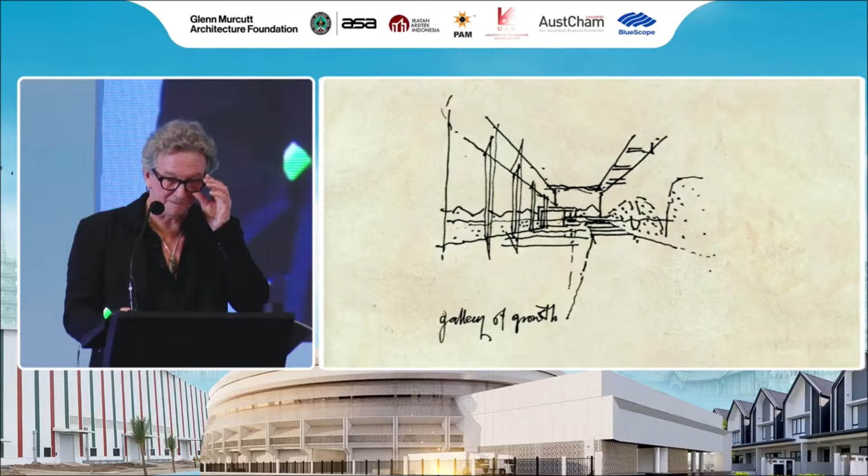In concert with that was the extraordinary history and culture of Oman and its people, and the coincidence of this incredible piece of geography and human achievements became central to the ideation. And providing a cultural touch point for Omani youth was a very passionate undercurrent, both from the client and ourselves, from the project's inception. As a personal creative journey, the museum has been a compelling and joyful experience. The people of Oman have been so welcoming and open to me over the last decade, basically.

And there has been, out of that, a collective desire to create a contemporary narrative for the Omani soul, a place of pride and ownership by all Omanis, and in particular, as I mentioned, for the youth of Oman. The compositional outcome is a cocktail of that incredible human achievement alongside this compelling landscape. And I think there's an infinite source of inspiration in the flux between the intimate stories of people and the grand stories of their physical environment.

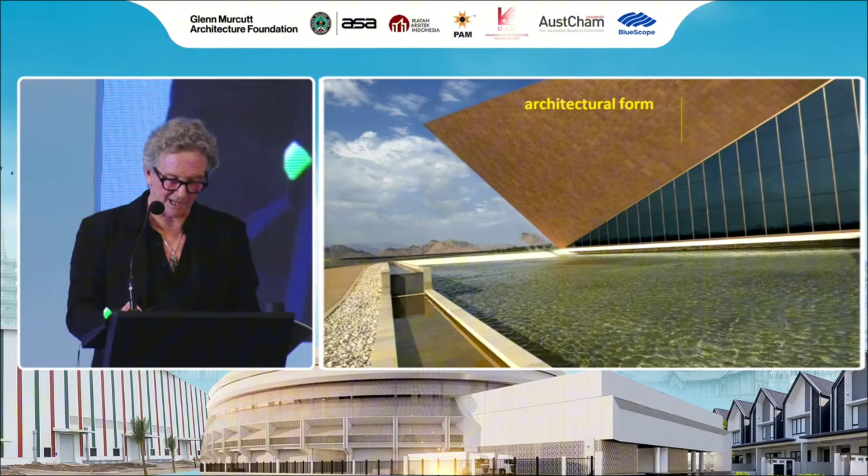The ideation for the architecture emerged seamlessly from those points of inspiration. It's forged from an abstraction of the very powerful fractal angular landscape forms which surround, and refined into a carefully crafted elegant structural outcome. The outcome, in a way, galvanises landscape and building as two quite potent compatriots. The drama of the landscape is, in turn, underpinned by the drama of the museum. The museum then exerts its own sense of place within the natural surroundings as an authentically derived sculptural and experiential form.

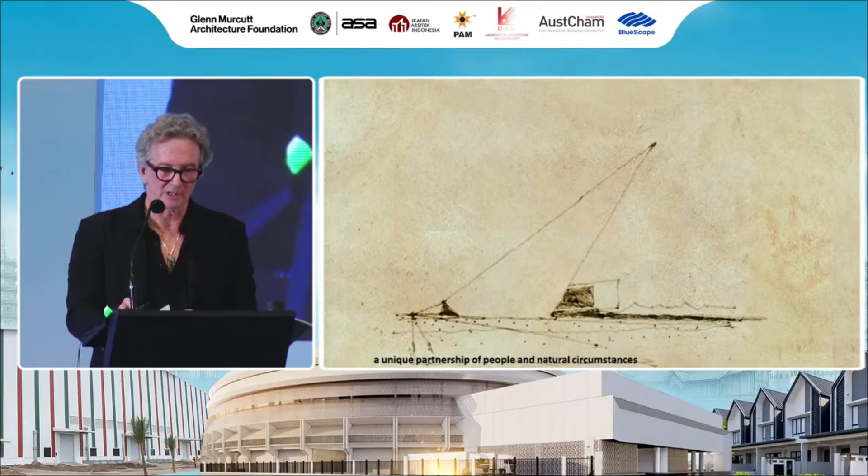And it has a deliberately unique personality, very much directly bred out of the earth of the site and of Oman. Volumetrically, the building literally emerges out of the earth, rising out of the land surface, and seeks at that point to create a blurring between natural surrounds and the physicality of the museum. So it is quite a unique partnership of people and nature, which has been a significant undercurrent in Omani life and history.

The Al-Hajar Mountains form an incredible jagged silhouette as the immediate neighbour embracing the building and the site. And the composition is abstracted from those extraordinary forms and translated into this unique structure. So the building form grows up and out of the earth from the south, rising to its own mountainous peak at the northern end. The building itself is an embedded part of the storytelling, so it's not just an enclosure, but a storytelling vessel in its own right. And in this way, the core narratives of the museum are echoed and reinforced by the building.

I think a successful museum is about an ensemble of storytelling where building, exhibition, and experiential qualities come together. And it's this complete ensemble which gives the museum its personality and potency. For me, as I mentioned, one of the wonderful characteristics of Oman is the fabulous sense of openness and welcome, both in its people and in its geography. And the building seeks to offer this broad gesture of welcome and generosity of arrival, which is an open invitation for all to join the museum.

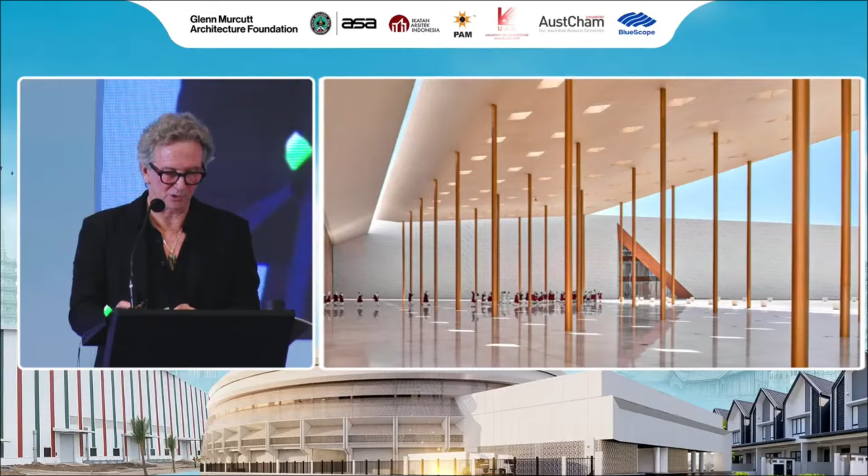This invitation leads seamlessly into the Welcome Hall, which offers panoramic views to the surrounding mountains. The journeys are largely intuitive and offer a progression of narratives from prehistory through to current day. So the journeys are thus orchestrated but still retain a sense of spontaneity and variety. There's the ability for choice in the pace and degree of forensic undertaking, and most critically, there's a progression from openness to immersion.

A core message within the museum is Oman's remarkable period of Renaissance, which commenced in the latter part of the last century and continues to this day, and there's a progressive volumetric rising which marks this moment in the journey. As a balance to the intensity of the immersive gallery experiences, the timeline gallery and reflection pool provide places and time to contemplate the stories that visitors have been immersed in, a gentle and quiet space of

calm. At the very heart of the composition, the village oasis provides a strong community focus. It's a place that people come to repeatedly as a part of daily life. The village oasis forms a crucial hub to the museum's journeys, a place of intersecting pathways and of social gathering. The stunning natural light of Oman does create very much the essence of the building and how it's read in its experiential qualities, and bathed in natural light, the spaces and materials are brought to life.

Throughout the museum, the horizon plays a constant role in the storytelling and placemaking. With reference to the horizon and to the external circumstance, visitors enjoy a high degree of legibility and wayfinding. It's a very intuitive and very clear device for orientation. The entire materiality and feel of the building is bred out of the earthen qualities of Oman. The geometry is extracted from the surrounding Al-Hajar Mountains. The fractal forms have been translated into the sculptural spirit of the building.

The broad spatial arrangement is a sequential progression from south to north. The desert parasol provides the opening embrace into the museum, leading on to the Great Colonnade as the core axial gesture. The purity of the diamond geometry remains the informing planning structure across the entire composition, and that patterning forms a beautiful and elegant overlay and underpins the spatial assembly of the museum. And it's a patterning which operates at a variety of scales, from the macro structure down to the more intimate details.

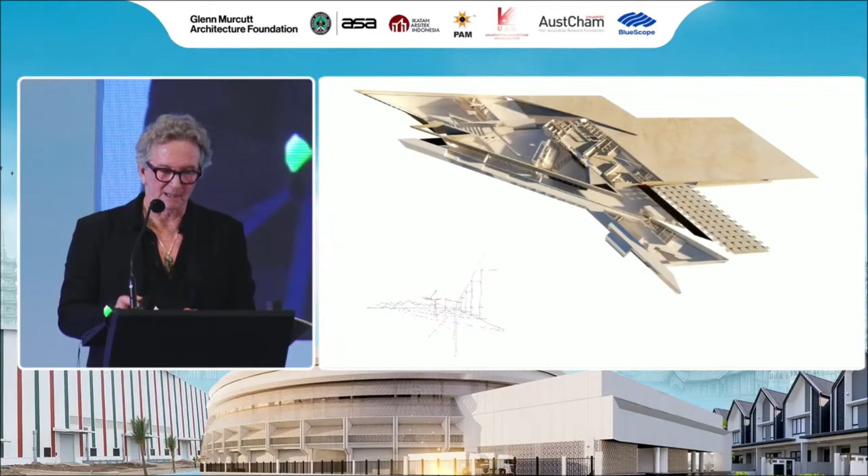The earthen roofs rise up and over the gallery spaces to meet the Great Colonnade, and the timeline gallery then becomes an integral part of the linear museum narrative as a chronological spine. The diamond planform steel structure springs from that linear element, creating very significant spans of 60 and 90 metres over the exhibition spaces. And sitting under this spine is a very long thermal labyrinth with phase change material which pre-cools the air overnight.

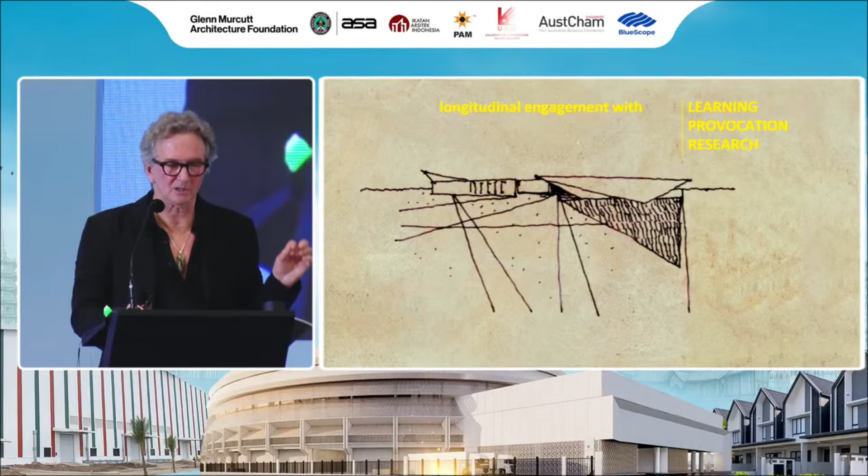The concept of the social museum underpins the ambitions for a museum that is owned by its community. And I think the wider notion of the contemporary museum entails longitudinal engagement with learning, provocation and research. And this is a crucial element for engagement with Oman's youth. And to that end, the Learning Centre is very much focused on this vital dimension of the museum experience.

The gallery experiences are predominantly and deliberately introverted and immersive, in contrast to the sweeping, generous open spaces. The journey into the galleries is focused, intensive and compelling. They're composed to deliver intuitive storytelling in a two-way dialogue with the visitor. And in some areas, they're deliberately visually compelling, allowing the storytelling to be told and absorbed by all ages. And layered storytelling remains informative and accessible to all of those demographics.

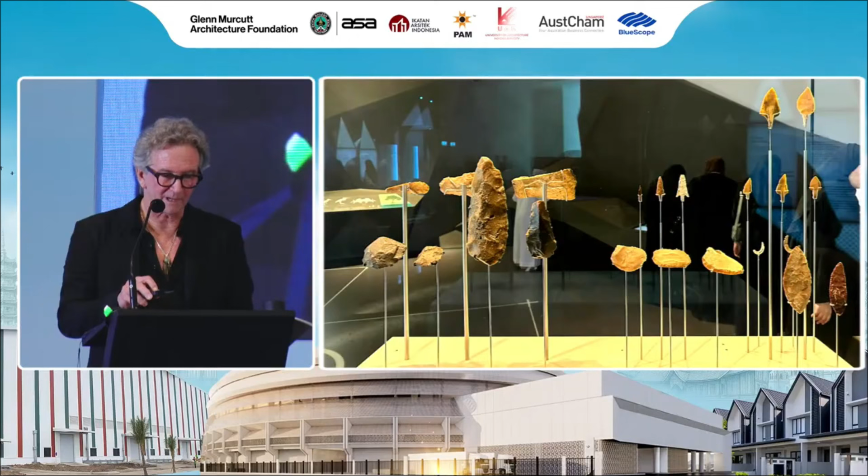The museum is relatively low in terms of object count, and where the objects do occur, they're celebrated in a more forensic manner. And there are distinct shifts between the very tactile elements through to, if you like, the smooth tech elements that also exist as a part of the storytelling suite. Interestingly, the building itself and its design ideation became part of the exhibition narrative ultimately, unpacking in a way some of the stories I'm telling today as a part of the museum's own narrative.

Outside of these primary gallery experiences, the museum domain is shaped by natural light. There's a contrast between introverted and extroverted experiences, which I think is a very powerful storytelling device. The desert parasol forms a generous hovering form of shelter which beckons visitors into the welcome hall. And the desert court adjacent provides the only coalescence of vehicular and pedestrian movement amidst a very abstracted, minimalist desert landscape. It's a non-constrained and visually inviting arrival under the cooling shade of the expansive hovering parasol.

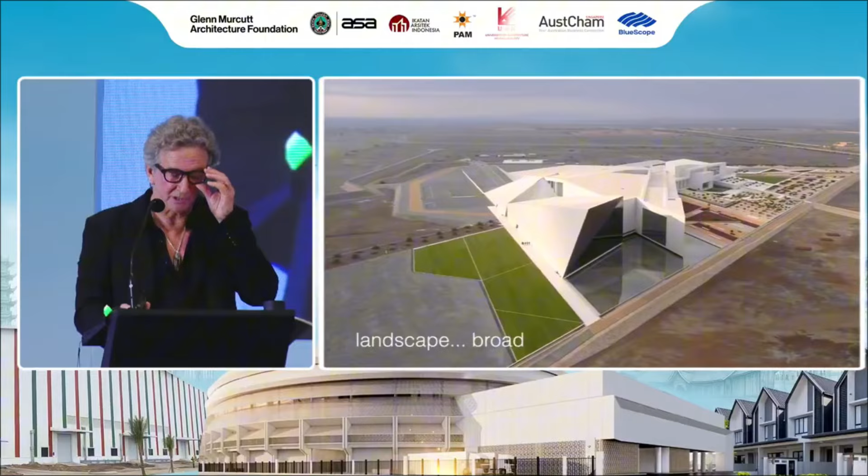The overarching philosophy for the landscape was very much a light touch. The natural landscape, as I mentioned, is an extraordinary circumstance that we wanted to nurture rather than intervene with. To that end, the bulk of the site has been left in its raw form as a beautiful broad gesture. And as you move closer to the building, the more intimate spaces become slightly more manicured, creating a series of outdoor rooms and spaces.

The entire building palette is drawn from authentic Omani materials. In particular, the composition is drawn from local Oman stones from various regions. These are very beautiful stones that are truly at one with the museum's locale. Copper is also synonymous with Oman and provides a rich counterpoint to the tactile qualities of the stone. The stone is exquisitely crafted and delicately patterned.

A water narrative bookends the composition from arrival to contemplation. Water and its harnessing is the lifeblood of Oman, and the falaj lines which radiate out from the museum symbolise this importance. A narrow water falaj also forms a hallmark adjacent to the main arrival, leading into the welcome hall.

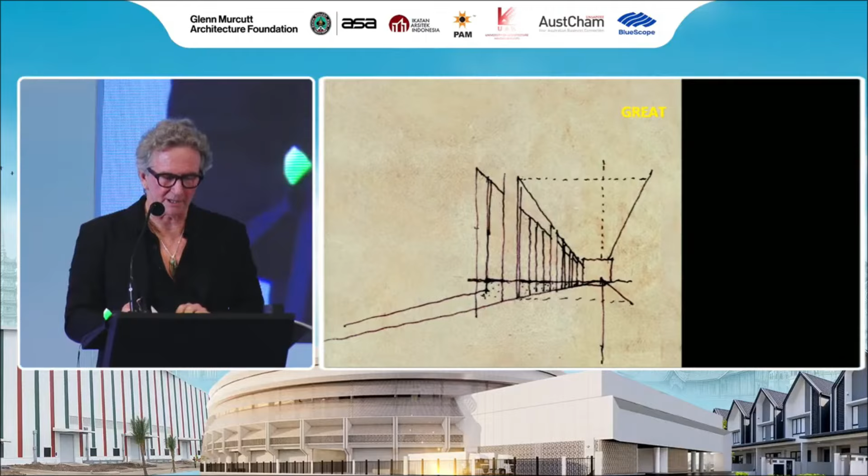The beautiful longitudinal journey which runs through pretty much the entire length of the museum is embraced by the great colonnade to the west. And it provides this wonderful—it's a bit hard to see in photographs—sense of distance, almost endless distance, leading to the external horizon, which beckons beyond.

This experience then extends outwards into the landscape and to the mountains. There's this great sense of generosity of place and openness. It's also quite chameleon-like under the influence of the ever-changing light conditions, and just as the mountains themselves change their mood quite dramatically throughout the day under the shifting sunlight, so the building parallels these moods.

The building adopts an overall premise that no light fixtures are visible in terms of artificial light. The light is visible, but the source is not. Into the evening, the building slowly comes alive with gentle and discreet lighting. The elegant, rhythmic quality of the colonnade becomes accentuated as night progresses, and in this way, the museum continues to shine its story from afar, well into the night. And indeed, it continues its community life well into the evening, well beyond the realm of the traditional museum.

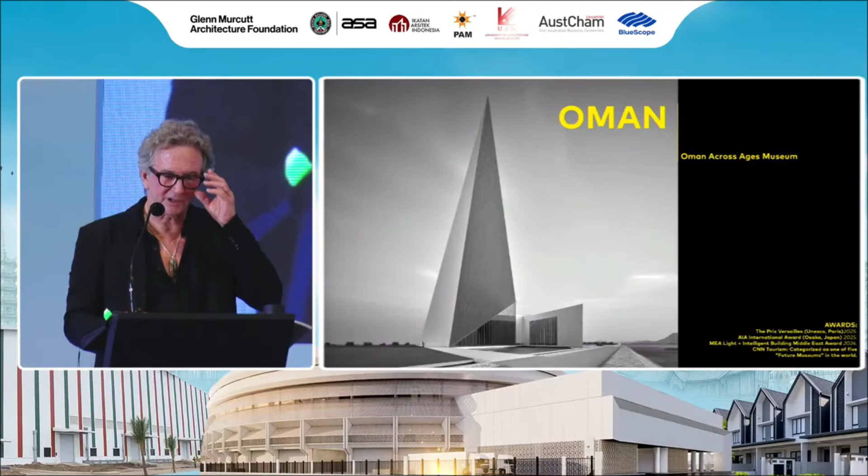So to circulate back to the essentials, I think this is very much a cultural storytelling museum. It's not a tourism device, and that storytelling is a continuum from architecture to exhibition. The natural circumstance is a powerful undercurrent in the forging of the architecture, as is the cultural richness of Oman. So if we arc back to the original provocation, I believe that creating authentic cultural vessels remains crucial to our societies' future resilience and well-being, particularly in the face of technological change that we see currently.

We must, in that sense, tell our stories from a clear understanding of place, culture and circumstance. Within that lens, cultural architecture can be an extraordinarily potent storytelling device. So for those of us involved in forging our physical realm, we have an enormous responsibility to shape and honour those legacies. And I think this can lead to outcomes which are owned and treasured by their communities. Thank you.